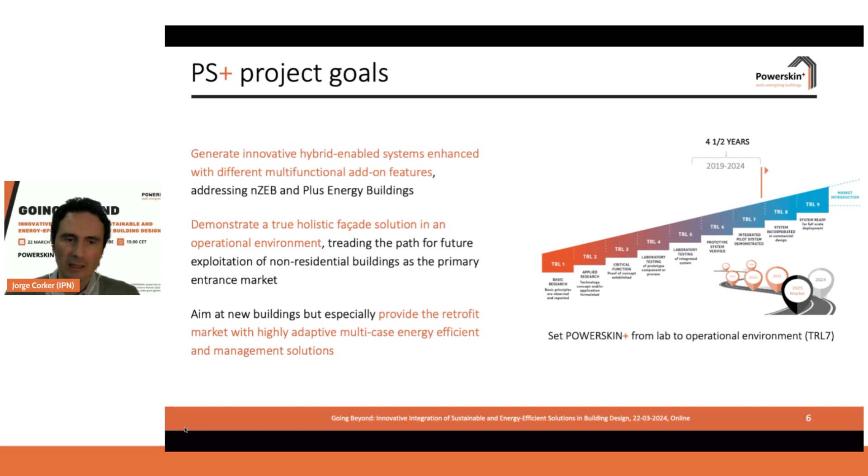The project goals were very straightforward. The aim was to generate innovative hybrid-enabled systems enhanced with different multifunctional add-on features, and to demonstrate all these systems in a true holistic facade solution in an operational environment. We were aiming at new buildings, but especially we wanted to provide the retrofit market with highly adaptive, multi-case energy efficiency and management solutions.

So we tried to gather a number of key enabling technologies for smart curtain wall facade solutions, dealing with super insulative and energy efficient elements, multifunctional nano coatings, solar energy harvesting components based on flexible solar cells, active and passive thermal storage materials and elements, and electric energy storage features.

We tried to focus on providing the future market with both standard, less costly solutions, and a bunch of different combinations possible, which will obviously be more premium in terms of cost. We aimed for different solutions for different geographical conditions, building types, national regulations, and budgets, trying to find a true energy management turnkey package following superior energy efficiency and sustainable eco-design standards.

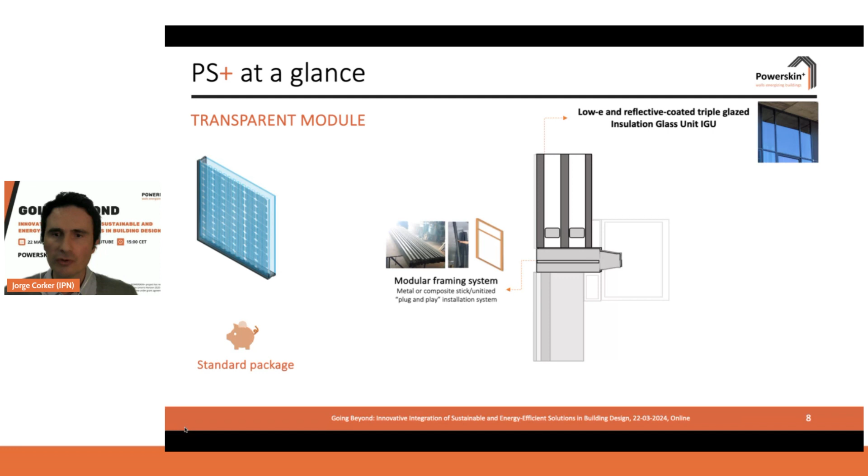Just to give you a glance of what we've tried to do: we divided the project into transparent and opaque modules, and always tried to find a standard package. In the case of the transparent module, that could start with a modular framing system, either metal or composite, a stick or unitized system installation, combined with low-E and reflective coated triple glazed insulation glass units, standard IGUs, and then filled with different layers of add-ons.

For the transparent module, we had microfluidic devices for active thermal storage, using capillary glass sheets with heat storage materials. We enhanced these transparent modules in the premium designs with facade building integrated photovoltaics based on semi-transparent perovskite PVs.

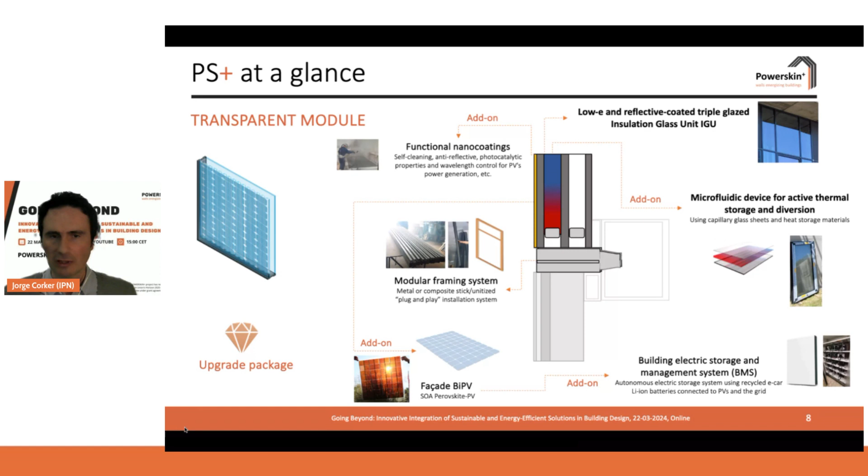We combined these PVs and this harvesting energy solution with a building electric storage and management system, using an autonomous electric storage system with recycled e-car lithium-ion batteries connected to the PVs - and that can be any PV, not just the perovskite one - and also connected with the grid.

These transparent module add-ons can be combined with functional nano coatings for self-cleaning, anti-reflective, photocatalytic properties, and wavelength control for the PVs. The opaque module standard package, again a little less costly, starts with the same modular framing system, combined with skin frames made of glass, composite, or metal solutions, having inside a super insulation module made of vacuum insulation panels, VIPs, and recycled EPS frames.

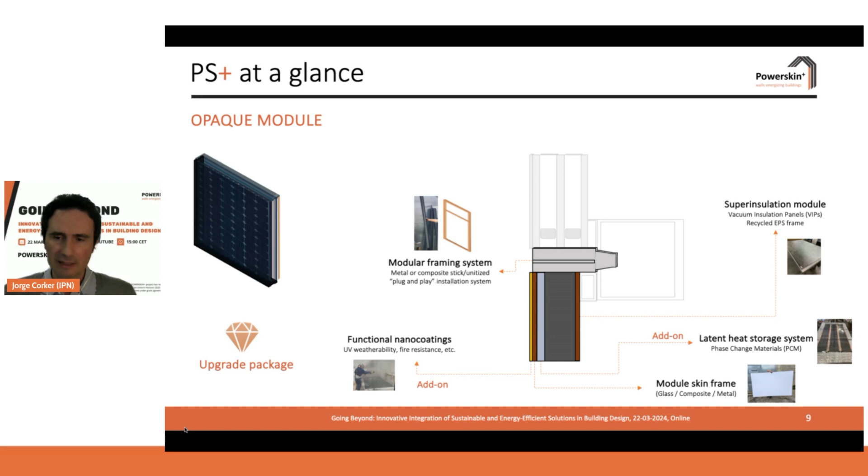The upgrade package combining this initial solution can be enhanced with functional nano coatings for UV weatherability and fire resistance capabilities. We also provide an add-on with latent heat storage systems based on phase change materials. Again, like in the transparent model, we combine this with facade building integrated photovoltaics - opaque perovskite ones - and the same electric storage management system described previously.

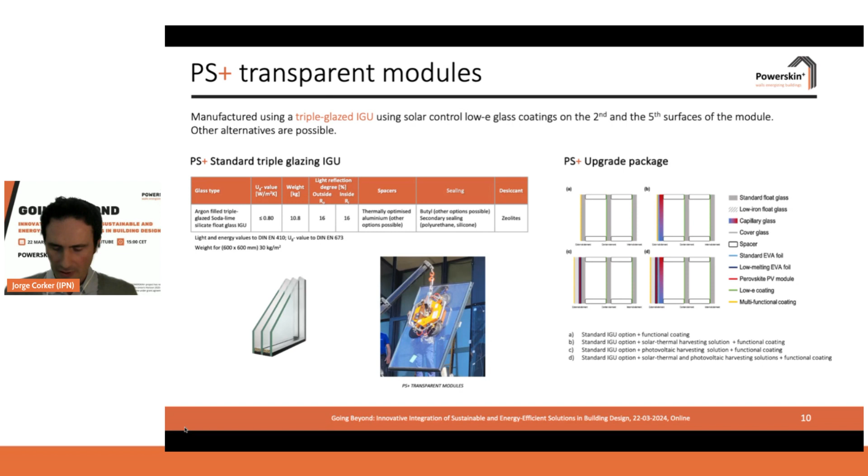So the transparent models use triple glazing IGUs with solar control low-E glass coatings as a standard. In the upgrade package, it can be combined with different functional coatings, different solar thermal harvesting solutions, the glass capillary system we developed, or the semi-transparent perovskite solar PVs. This is how we envisage these transparent models could work in different solutions.

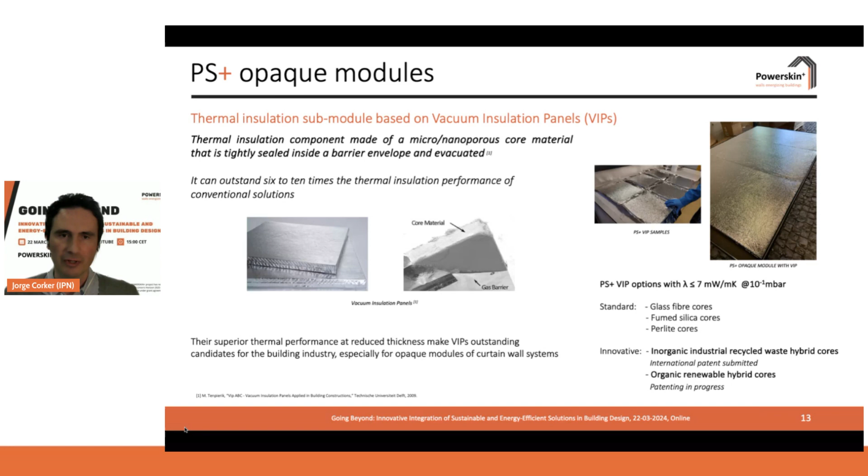Regarding the add-ons for the transparent model, we have a patented glass-to-glass capillary fluidic device for large area integrations with adaptive facades and smart windows. These are flat laminated glasses made through a microstructured glass sheet and a thin cover glass using a polymeric interlayer. The capillary channels are filled with liquid, providing optical transparency. You can see some installed examples at your right—it's transparent, you can see through it—enabling efficient solar thermal heat harvesting as well as heat exchange at outdoor temperatures upwards of 8 degrees.

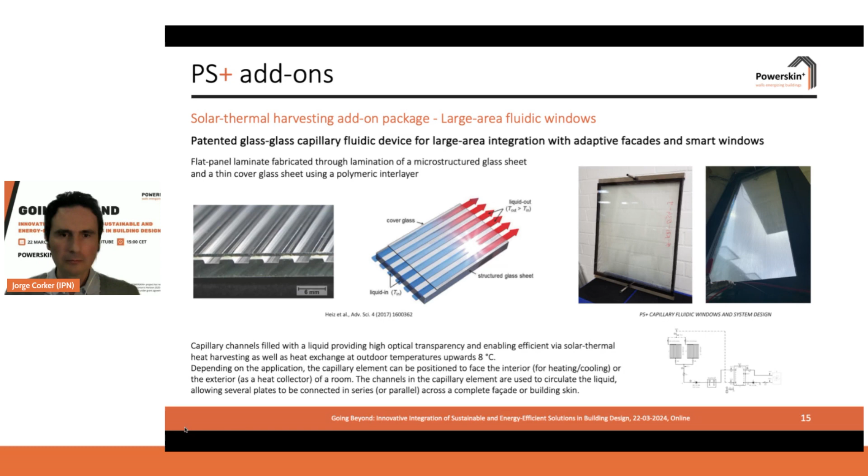Obviously, perovskite technology combines a lot of advantages when compared with conventional PV technologies. It's still a little bit below in TRL development, but it's increasing, and we believe we've made some advances in our project towards bringing this new type of technology more into practice, and in the future it will become a reality.

Regarding multifunctional coatings, we've designed, developed, and tested different types of coatings for the semi-transparent and opaque models, regarding self-cleaning, self-healing, infrared reflectance, transmission enhancing, and flame retardancy, using titanium oxide nanopowders, silicon oxide nanopowders, and indium tin oxide ones.

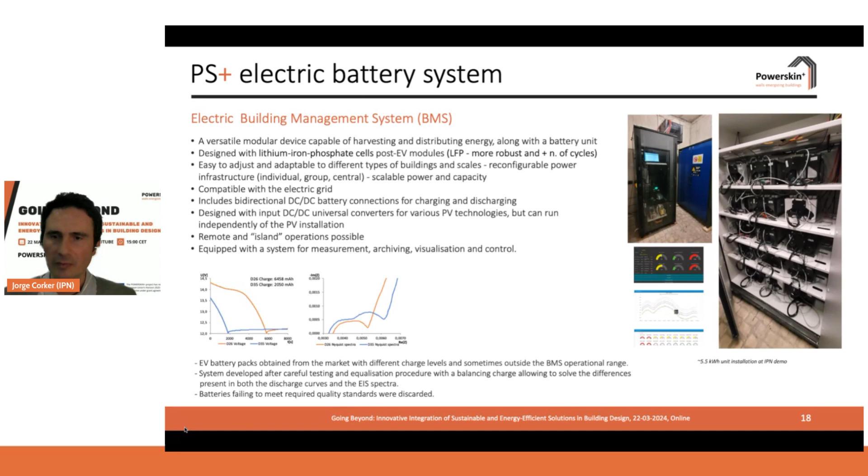We also had a lot of mock-ups and testing installations. I just put three of them. In Polytechnic of Torino, we had a 4 square meter mock-up with a lot of different technologies developed: standard, opaque, and transparent modules, premium ones with microfluidic glass storage systems, and premium opaque models with building integrated photovoltaics.

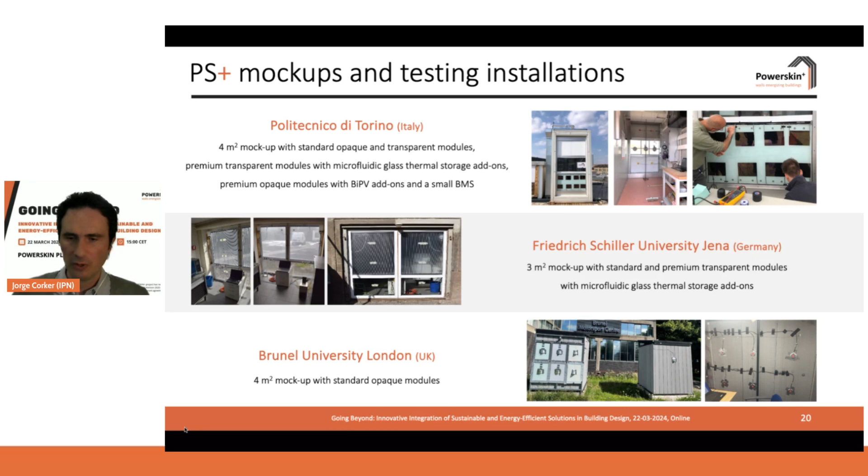We had Friedrich Schiller University Jena in Germany with different mock-ups, also a little bit more related with the transparent models and the microfluidic glass system. And in Brunel University, London, in the UK, we had mock-up test cells with standard opaque modules being assessed during a one-year period.

Regarding the demo sites, we've tried to have these systems demonstrated in an operational environment in three different non-residential buildings in three different European countries: Portugal, Germany, and the Czech Republic. We assessed a lot of different issues regarding these installations, regarding inner thermal and visual comfort, clean electricity production, and energy savings. We had demonstration activities with installation and operation guidelines.

We have been developing some BIM library, and also all this assessment was backed up with LCA, LCCA, and social assessments towards economic and environmental sustainability principles.

I'm just going to show you some examples of two of our demo sites. One in the Czech Republic is still being dismantled - it's part of our activity, so I won't get too much into detail - but in Portugal we had a 61 square meter facade.

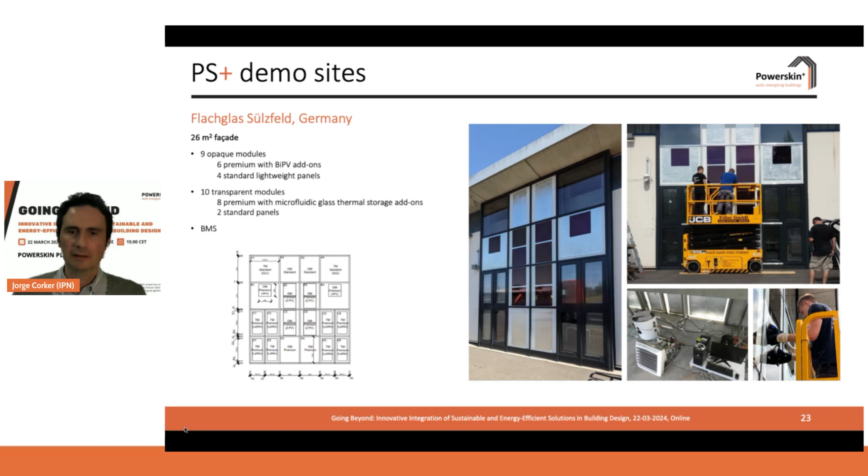In Flachglas Sülzfeld, Flachglas premises in Germany, we had a smaller facade, almost 30 square meters, with 9 opaque modules and 10 transparent ones, and also a BMS system. We used these facades to monitor the capabilities of the different solutions that we've developed.

The latest Renovate Europe report states that 18 jobs might be created for every 1 million euros invested in the energy renovation market. So this is something we should look at very closely and harbor these new innovations in order to speed up the transition, but also to renovate the economy in our continent.

And considering that we might have a very small share of the market, the Powerskin technologies can still be involved in a very big market rationale, in the first years of novelties that can be commercially deployed. So it's very important that we can bring this right after the project onto the road to market.

We are working on it. We already know more or less how we can exploit and who's going to be exploiting what within our project. We have key partners lined up for making this deployment for the market. So we are very hopeful that we might generate some impact with the innovations and with the support that the European Commission gave us.

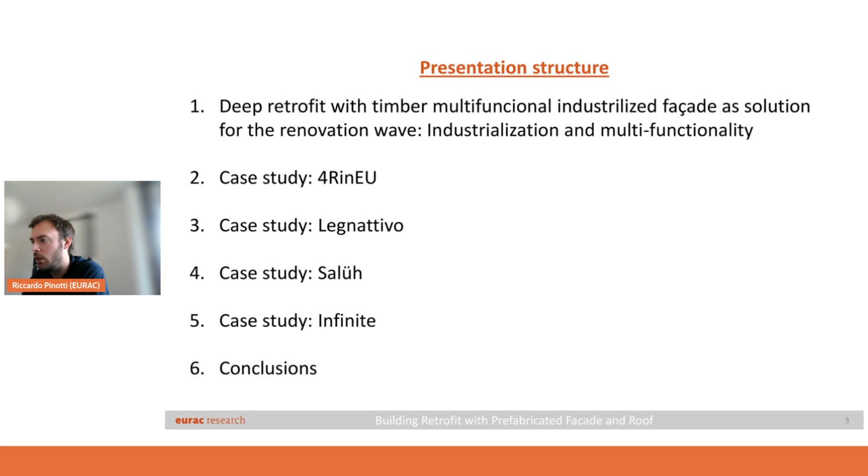At EURAC, we studied and are studying, developing a lot of projects on this topic. So I will provide an introduction to this kind of intervention on existing buildings, and then some study cases we developed in different European and national projects.

These are numbers we are all aware of: about 40% of consumption is due to the building sector, with a huge amount of emissions, and a strong need for solutions which can foster deep retrofitting together with fast retrofitting of the building stock. This retrofitting wave is not progressing as we would have expected, so we need technological solutions to speed it up.

What we propose and are studying is intervention on existing buildings based on using prefabrication coupled with timber manufacturing to build modules which are attached to the existing building, basically creating a new skin for the building - a new envelope and a new structure.

The idea is not just to provide new insulation in terms of thermal performance, but also to provide the so-called deep retrofit - not just thermal, but also from the comfort point of view, and maybe from the aesthetic point of view.

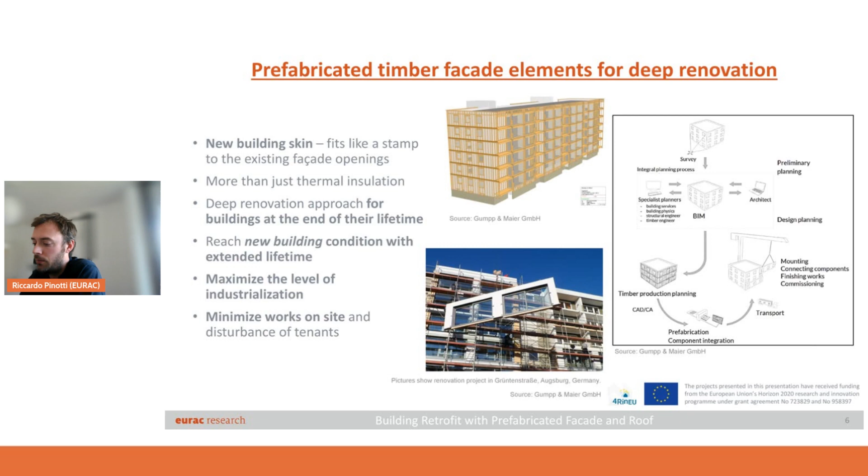The aim here is to maximize the works performed off-site, in factories, and minimize the work done on-site, on the building site, also to reduce occupants' disturbance.

These modules, you can see an example here on the right in the picture, may be bigger or smaller. In this case you see a big one, but we will also talk about smaller kinds of modules.

They should be easy to apply and install, and of course an added value of the prefabrication is that we can reach a higher quality of the technology itself.

As I said, it's not just about the insulation that is added, but with this kind of intervention we are also able to integrate multifunctionality within the new envelope. We'll see examples later, but I'm talking about windows, new shading systems, new ventilation machines to improve indoor comfort, and whichever kind of cladding, maybe green facade or also technology capable of producing renewables.

As I said, the aim here is to maximize the work done off-site. The more we can achieve in the factory, the better it is - the less we do on the building site.

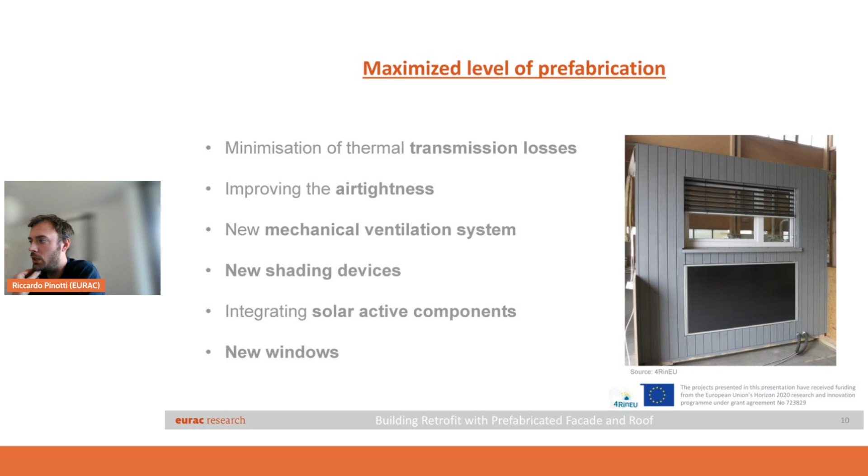Here you see an example of a prototype we did for one of the projects, called 4RinEU - already concluded, a European project, EURAC coordinated. This was a prototype of a timber frame module integrating new windows, new shadings, and a solar thermal panel, together with a ventilation machine beside the window on the right side. These were the features we tested during the prototyping activities.

A very important point, I would say very critical for this kind of intervention, is the anchoring to the existing facade. This depends on which facade or building we have - it may be a concrete building, or a timber frame building again. Depending on this, the anchoring system has to be defined.

On the concrete ceiling, for instance, we were able to attach timber beams to which we then attach the new modules.

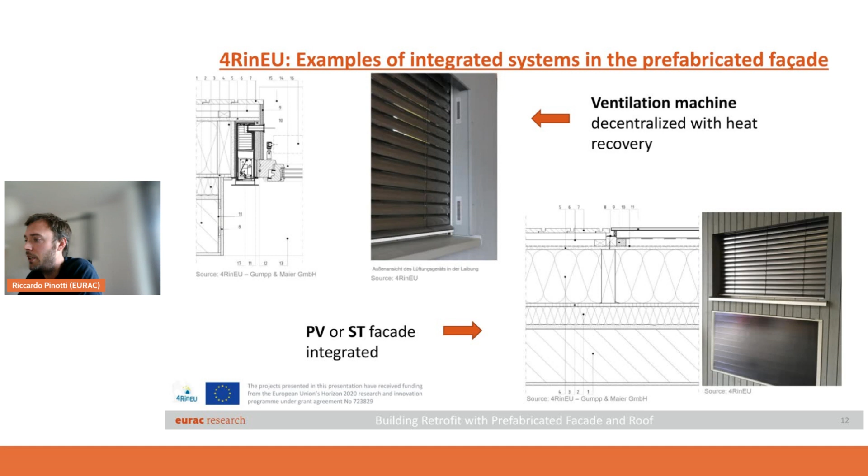Here you see some kind of installation that provides the multifunctionality. This is a horizontal section where we can see, top left, the installation of the ventilation machine, and the solar thermal panel on the right. Here again, other kinds of integrations dealing with the ventilation machine and its ducts, all going through the prefabricated facade.

We start now with the first case study, coming from the 4RinEU project. Here we had 4 buildings to be renovated, and in each one we tried some of the features of this kind of intervention. On the left you see the pre-retrofit condition. They were all quite poor buildings in terms of thermal performance and indoor environmental quality, and all the interventions addressed this. On the right you see the final outcome of the renovation.

In this case, in Norway, we added the new facade as well as the new roof, both prefabricated, with some PV panels integrated and new windows in the modules, together with a ventilation machine installed behind the building, exploiting a cavity already present there.

This is the Spanish demo, a concrete building with a lot of problems related to mold growth. On the right you see the final results.

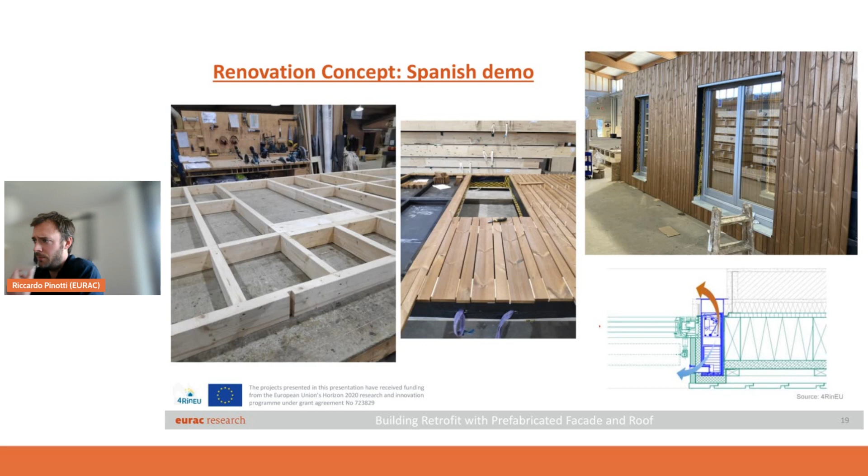This is the installation phase, and you can notice that scaffolding was not even necessary in this case. The L-shaped steel anchoring was already in place, and the 6 modules were hung, with 2 workers and 1 operating the crane.

Then some works were needed from the inside to fix the part around the windows. On the website you can see a lot of videos and time lapses of all the interventions.

Another project we developed is Legnattivo, a regional project with European funds. In this case, instead of studying big modules like those seen before, we opted for smaller modules, trying to create a sort of configuration possible between different technologies to be installed.

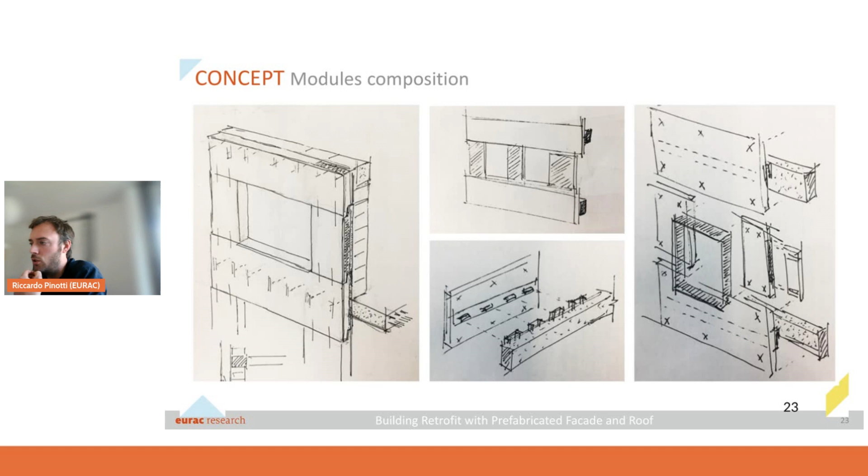In this project we didn't perform any activity on real buildings; it was just a theoretical exercise, together with a prototyping activity we developed at EURAC. We created a real scale prototype including 3 sub-modules: a passive one, one integrating a duct needed for the ventilation machine located in the other modules, together with a window, and then a PV module.

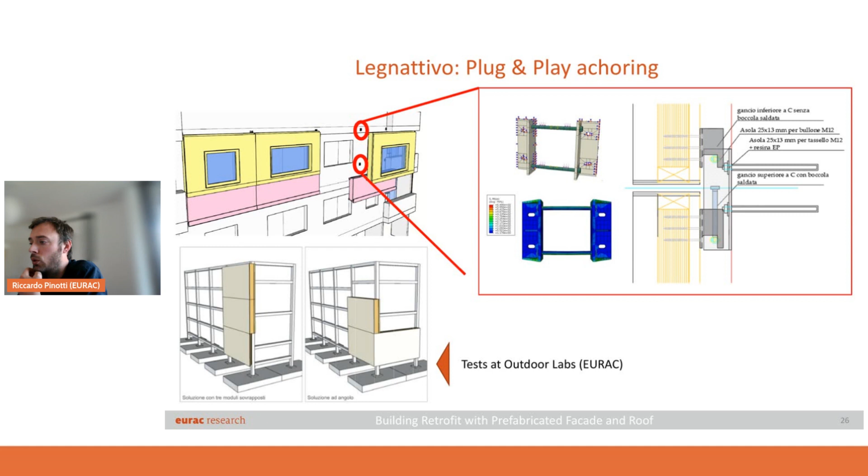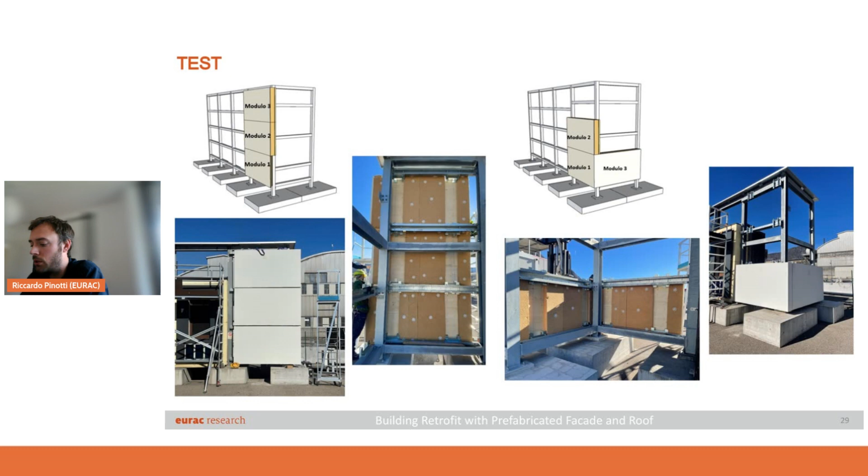We also studied a lot about the anchoring system, which had to be as plug and play as possible, allowing anchoring and disanchoring of single modules independently from the others around. We developed some prototypes and tested them at our facilities, including a small passive module where we studied the functionality of the anchoring system, trying different configurations of installation and uninstallation.

Another really important topic included in this project was the integrated seismic and energy retrofit, related to earthquake solutions to prevent seismic events. Together with a colleague from the University of Rome, we studied this kind of exoskeleton, embedded in the whole building, inside which it was foreseen to have modules for the energy retrofit.

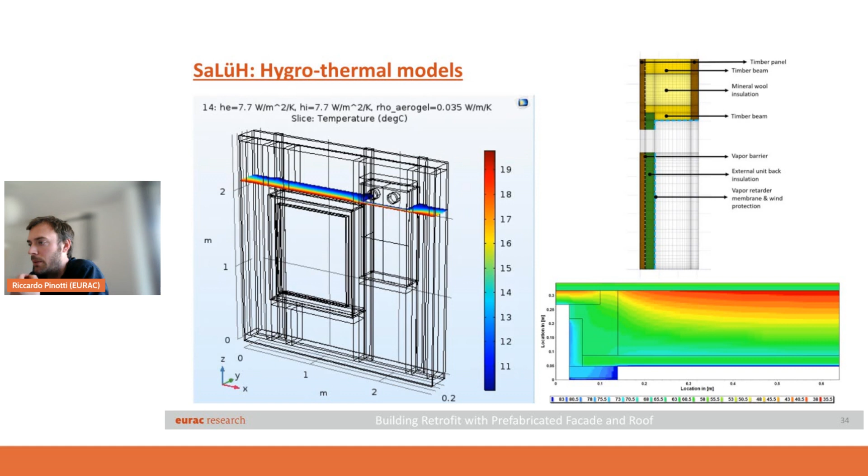Another project I personally worked on during my PhD at the University of Innsbruck was another timber-based envelope for retrofit. In this case, it hosted a micro heat pump and some ducts. Here you see the stratigraphy and new windows. It was tested in a passive cell from the hygrothermal point of view. We did analysis in terms of thermal bridges, trying to understand whether critical components such as the compressor and evaporator of the heat pump could create issues within the facade.

The last case study is another European H2020 project we are coordinating at EURAC, called Infinite, still ongoing. It's again related to prefabricated wooden-based facade as well as roof, with different technologies involved in the studies. Starting from the cladding, we are studying green cladding, so green facade, and the irrigation system integrated in these new modules, then BIPV modules.

These are all photovoltaic panels, different colors and different efficiencies, but from the aesthetical point of view could be an added value and foster the use of renewables in the facade. Together with this, solar thermal is integrated into the facade - we'll see a picture later with this collector for solar thermal.

From the integration point of view, Infinite is studying the integration of a ventilation machine, but in this case, instead of the one we saw before, this machine is meant to serve the whole floor. So it's a quite big ventilation machine with a lot of ducts to be integrated, which was quite challenging. And finally, some smart glazing within the windows.

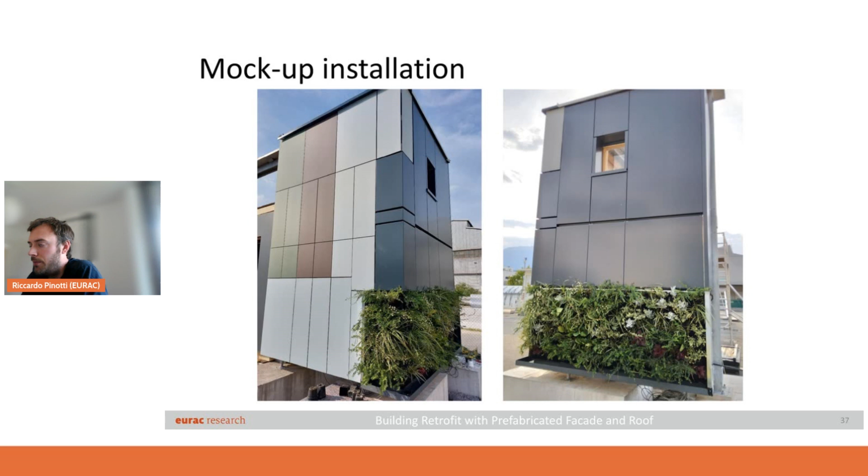Here you see the technologies related to the cladding I mentioned before, photovoltaic panels and the solar thermal collector on the facade together with the green facade. This is just a sketch of the integration of the ventilation machine within these prefabricated modules and its ducts. We studied ventilation integrated below the window, and also in another configuration on the balcony side. These are the prototypes we developed.

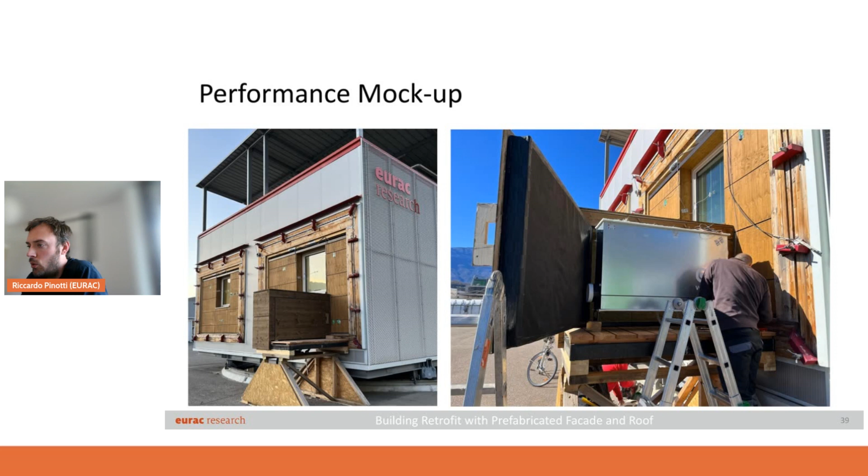The two facades are similar. On the left, there was no integrated solution, just a passive facade as reference. On the right, we studied integration of the ventilation machine below the window and beside the balcony. Behind these two facades there are two divided rooms in which we can study and create the conditions of temperature and relative humidity that we want.

To quickly get to the conclusions, due to the inefficiency of the building stock, as I said before, a real renovation wave is needed. Spot interventions are not enough - we need a massive alternative to renovating the whole building stock. In our opinion, industrialization of the process and the use of prefabricated panels can be the solution. We still need to discuss the level of multifunctionality we want in these modules, but prefabricating them could really speed up the process. This speeding up could be helped by digitalization, supporting not only the construction process but also design, installation and delivery to the site.

Yeah, of course, from the performance point of view, I would say it's clear that this kind of intervention has a huge potential in terms of thermal energy and thermal performances, as well as allowing an increase and a better indoor air quality together with indoor environmental quality for the users.

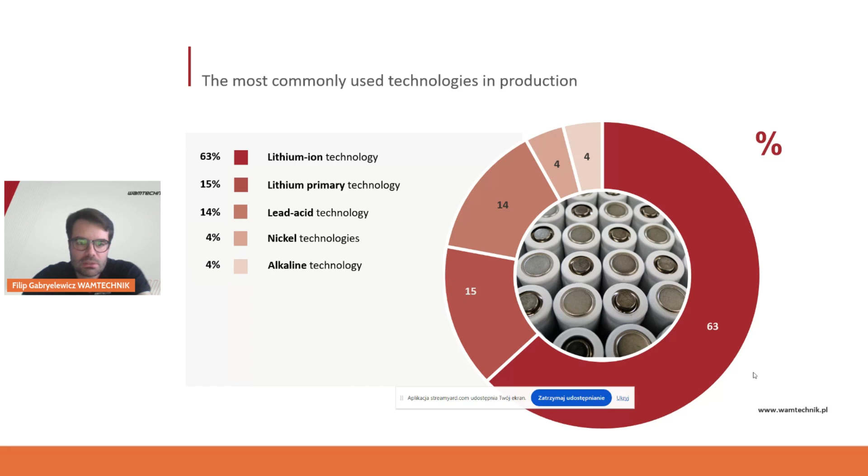Obviously, for the project and for the home appliance, I would say that the current idea is to make it in lithium-ion technology. But I believe that we also have to understand some challenges when we are talking about this technology. Let's maybe pass that one.

When it comes to lithium-ion technologies, right now on the market, we have three main ones. The standard one, the most popular, is technology at 3.6, 3.7 volts. Depending on the chemistry, usually it's NMC, NCA, LCO - it's just the difference of the cathode material. Here in this technology, we will have the biggest energy density, and we can basically say that this technology is the most active one right now in EVs.

Nevertheless, you can also find LFP and LTO cells, battery packs, which are also running in EVs. And I would say for the home storage, we would focus on the LFP technology, which has slightly lower voltage and a bit lower energy density. LTO, maybe not all of you know, it's technology used, for example, in buses, because you can basically charge it in a very short time - like 8 minutes, for example, you can recharge the bus.

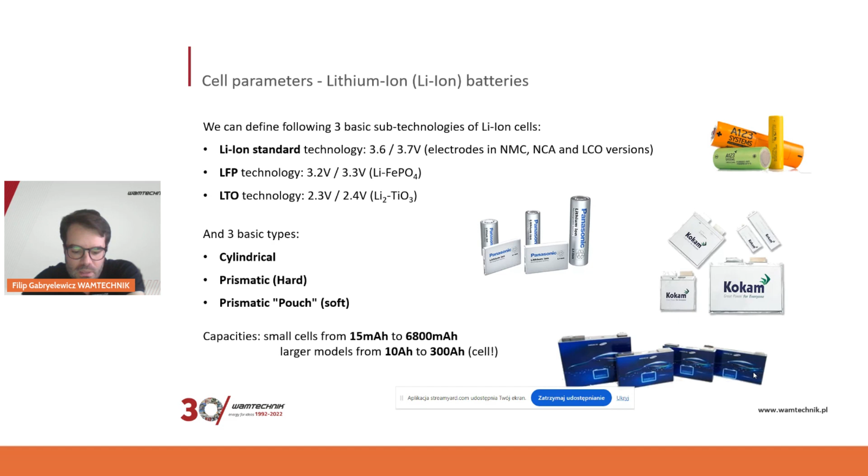When we talk about the features, I would say that all lithium-ion technologies are limited because of the necessity of R&D and because we need to build and implement some kind of management system that will ensure the safety of the application. It's quite important - I will show it to you in a minute what is the actual behavior of those cells, to understand that this energy, which is inside of the cells, inside of the batteries, is pretty huge, to be honest. And we need to ensure that we'll have stable and safe operation at all times.

Maybe let's just pass that one. All the examples I will show you are prepared because we have our own lab and own production and own design. WAMTECHNIK is doing different projects - we have small battery packs, which are just one-cell battery packs. The biggest we produced were actually for buses, where each battery was around 160 kilowatt hours, and that would be the application which we are talking about here.

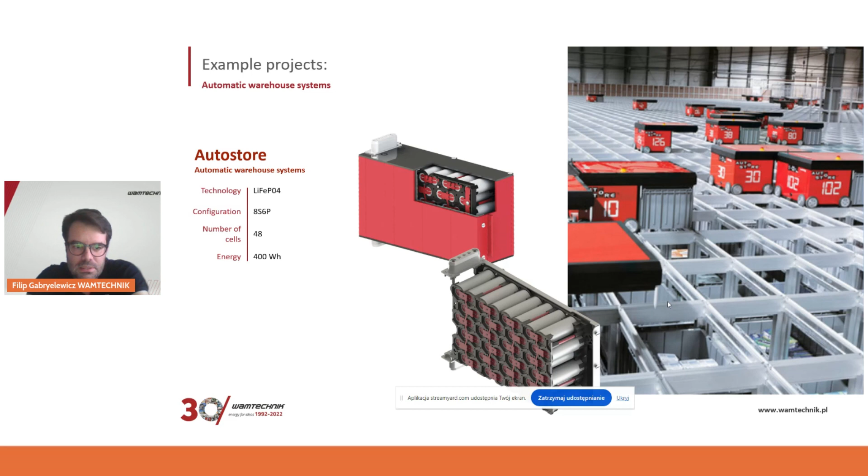Just two examples - one of the most common is an automatic warehouse system in LFP technology, and LFP was chosen because we need to ensure higher safety in warehouses, and I believe that this technology right now is the best when it comes to home appliances. Also, we are doing some challenging battery packs, but usually when you need higher currents - so higher charging, for example - then we would have to switch to NMC technology, which has no such limits like LFP technology, and the limit is actually the charging current, I would say.

Currently, all the clients and expectations from the market are that we need to improve the energy density, and we need to have the longest running time of the battery in any application. So I would say that's the challenge, because energy density and the behavior of lithium-ion cells is stable when everything is okay.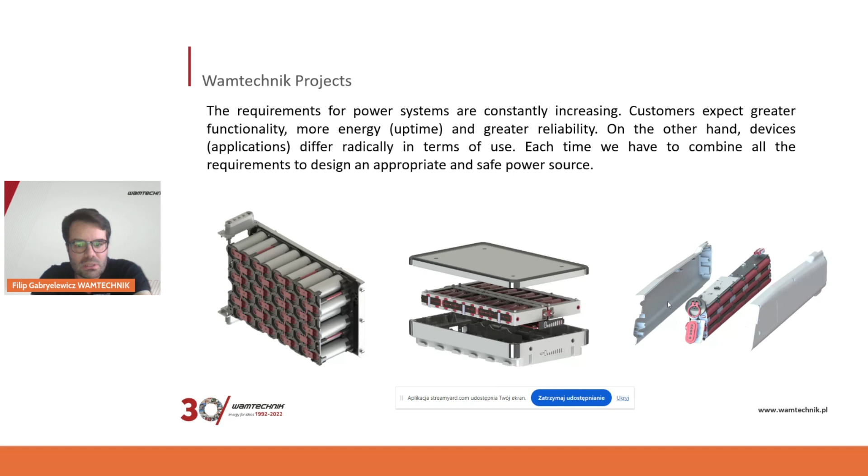But if we just go into some examples I will present to you, then maybe we will understand better that it is very important to control the operation and have a complex management system, a battery management system, that will ensure the safety of the operation.

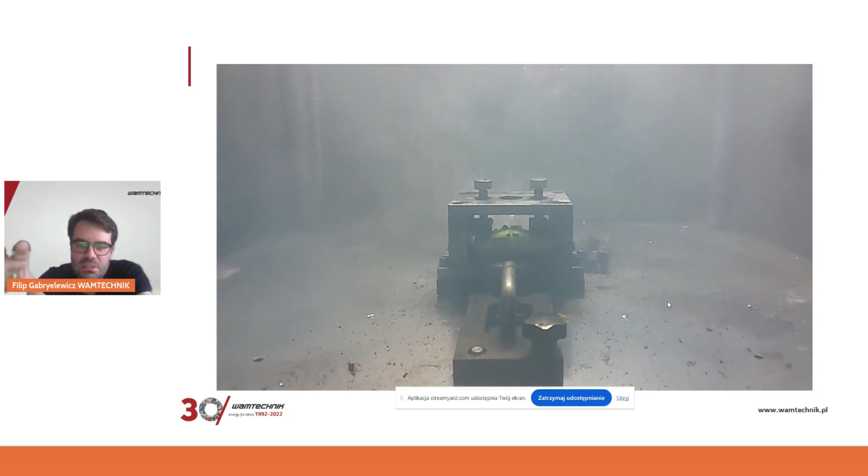So in the first example, I hope you can see the movie which is running. We have here the LFP cell, A123, a very good and reliable one. I am showing you the nail penetration test. Those are the tests we do in our lab to understand the behavior of the cell and the technology. In this example, it was a fully charged cell that rested for at least 2 hours before I did the test.

And we cannot see any fire. That's quite important for this presentation. No flame actually, just some fumes, some pressure, but it was quite stable behavior.

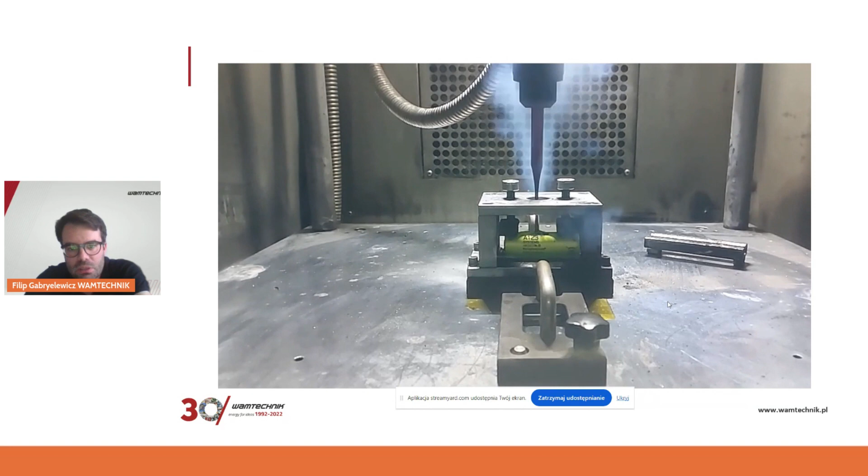But also with the LFP cell, if we talk about a cell which was charged a bit more than allowed, it's getting not so nice. We have a flame already, very big pressure, and the cell was completely destroyed. I'm showing those examples because here we charged it above the maximum voltage level possible for the LFP technology.

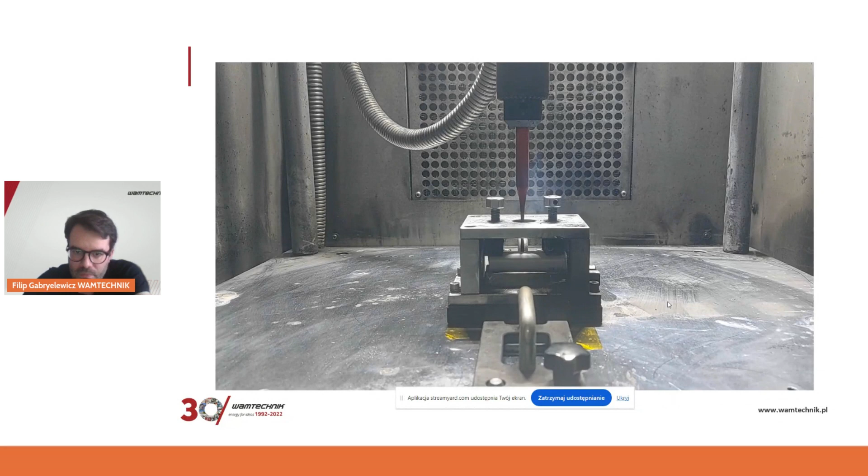Just for the presentation, here is an example of the NMC cell and its behavior. I like to show this one because, as you can see, this is an NMC cell and we have an example where we do not have flame, we do not have any fire. That's because this cell was charged to 4 volts, really limited from the possible 4.2 to 4.25 maximum voltage level for the NMC cell. So you can make a stable and safe battery pack with NMC technology.

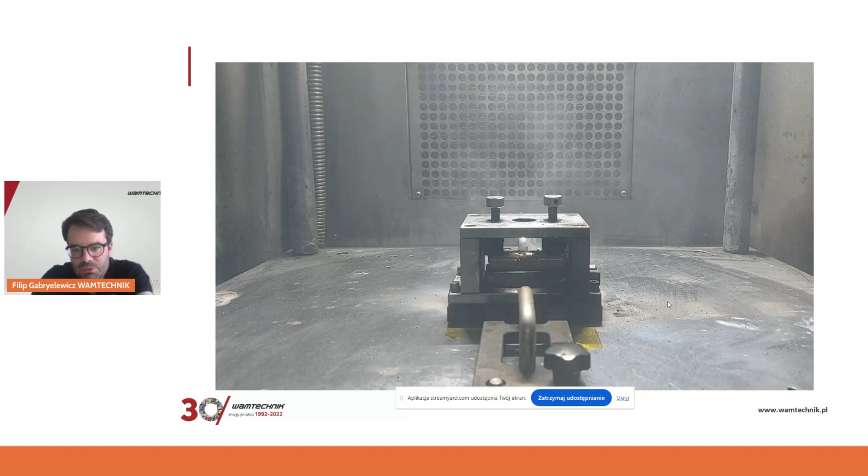But most cells these days in all applications we have at homes are usually charged to the maximum level. Here you will see the standard behavior of the NMC cell when it's broken, charged to 4.2 volts, so most of the applications. A lot of flame, a lot of fume, big pressure coming, and basically you can see that it's not a safe behavior, to be honest.

So to sum up what I wanted to show you, it is very important when we design the battery pack and the power source to have this understanding about the charging voltage and also about the SOH, the state of health.

You have here on diagram number 3 information that comes from one of the main cell producers, showing that reaching a certain SOH, state of health, also gives us an additional requirement that we need to limit more the charging voltage, so we ensure stable performance of the cell, of the battery. This is quite important, I think, for the application we are discussing, because the cells that will come from the EVs and from that sector will be used ones. So we have to consider in the design that possibly we will have to limit the charging voltage, and we would have to get a good understanding of the SOH, the state of health.

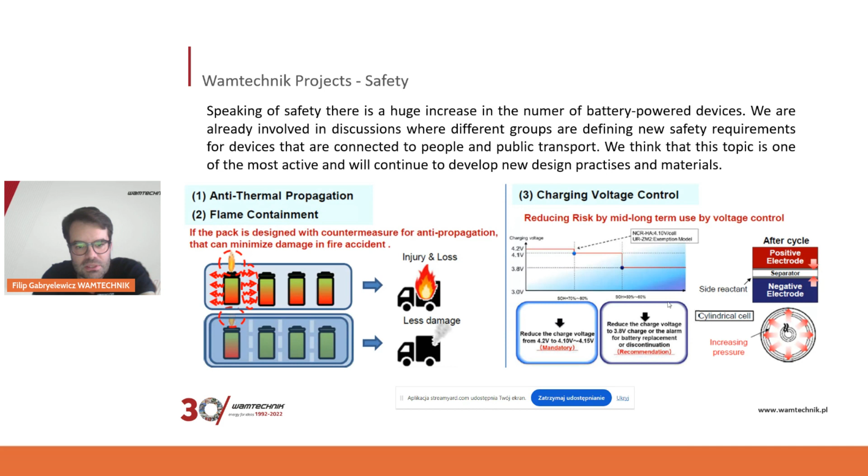It's good, actually, because right now the European Union implemented a regulation called the battery regulation, and in this battery regulation you have some rules coming to the market starting from August this year. One of the key aspects is that all producers of battery packs for certain categories, industry category with more than 2 kilowatt hours, and that's the home storage system, will have to give you information about the state of health. So in my opinion, it will be quite easy to control and understand what's the current status of health of the battery pack.

And yeah, that's actually from my side. Maybe it was just a short presentation and just some insights from the market, but I believe that understanding batteries, understanding chemistries, and getting those requirements into developing the battery systems are the most important ones. So we will have stable and safe operation.

Thank you. Yes, Filip, many thanks for your presentation. Great one, at least for me, because I have a battery pack here in my installation. Just, if you still have 1 minute, we have a question coming from the audience related to these safety issues that you talked so much about. It's from Sergio Lorenzo, asking how do safety issues influence the deployment of post-EV cells in building applications?

And what considerations should be addressed to ensure compliance with electric codes and fire regulations? I know you mentioned this new EU regulation about this. Does this regulation also apply to recycled batteries, or any type of battery system? And also, I would like to know your opinion about the transportation of these battery pack systems, because it's not just installing and operating, it's also transporting these packs for recycling. It's a big issue, and we had this issue in our project.

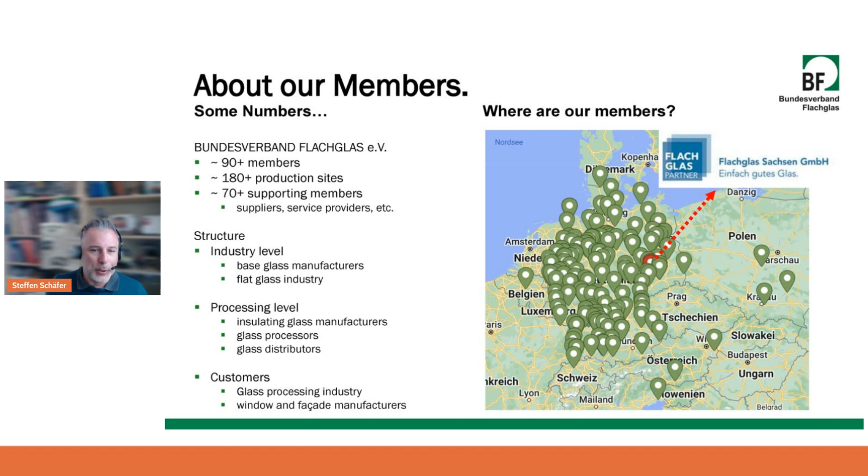Short about our members, here an overview about our members in and out of Germany. And here you can see also the location of our member and your project partner, Flachglas Sachsen. Mr. Witte asked me to do this presentation. I think I don't have the time to speak so much about the whole details here, but it's important for me to say that we are open for supporting members, suppliers and/or service providers, which can also become a member of our Bundesverband, and we can share experience, and you have maybe also a little bit of advantages if you are a member. So if someone is interested, let me know. That's about the Bundesverband.

About new interesting glass products: I've seen you have also used a lot of glass in this project, so there are new requirements. I couldn't decide which product or which application I wanted to present to you, so I've decided to give you a brief overview of what is currently interesting, what's moving the glass industry, or which products or applications are currently a big topic or becoming one. Glass is an invisible but very multifunctional product, as you have seen in your project also, and it always has to be able to do more and more. As you tried also in your project, a new function. But what does it mean?

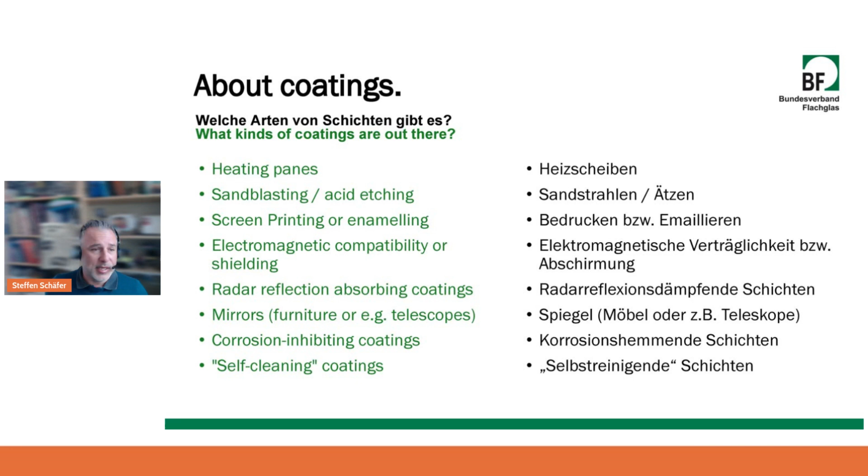But we have not only coatings, but also other requirements that glass can or must fulfill in addition to the coatings and all other technical requirements. We have safety glazing, break resistant, bulletproof, sound insulation glazing, fire resistance, structural requirements, switchable glazings, media facades, curved glazing, and combinations of the previously mentioned coatings, or maybe combined with new requirements in your project. So that must be all in one product.

In Germany, we call this the eierlegende Wollmilchsau. That's a really tough product when you combine so many different things in it. Maybe also new requirements are coming with a new European building regulation in the next one or two years.

That's the reason I want to start not really with a product. I want to share with you this topic instead. As you can see, not a product - it's currently the topic occupying us, and it will continue to occupy us for a long time in the future. That's sustainability. I heard it mentioned in some words, some slides before.

New products, yes, we need new products, we need new ideas, but the glass industry, in this case our industry, has to do some homework. We have to think more long term. We have to think about recycling or reuse. For example, maybe you have also considered it in your project - what is the glass doing afterwards? Can you reuse it? Can you recycle it? Can you remove every part of the glazing and the other parts of the product?

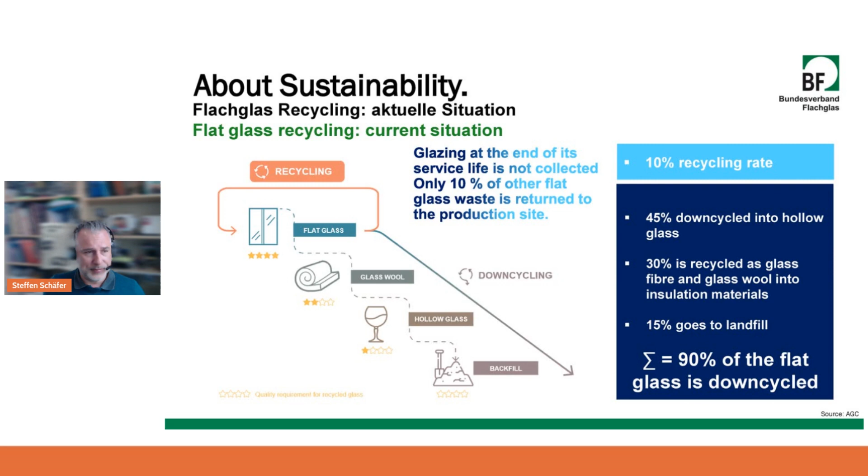Additionally, glass is an energy intensive industry, and we need gas. Gas is the energy source for the production of flat glass, and it needs around 1600 degrees Celsius to produce glass. This results in high CO2 emissions due to the burning of fossil energies, and the lack of glass recycling and reuse results in additional emissions.

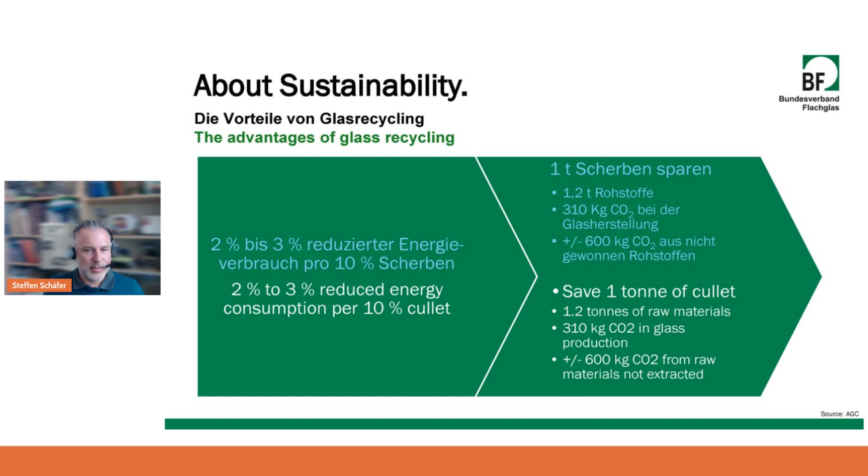How can we help? 2 or 3% reduced energy consumption per 10% cullet. So we need this cullet. That means 1 ton of cullet saves 1.2 tons of raw material, 310 kilograms in glass production, and around 600 kilograms of CO2 from raw materials which are not extracted. So it would be nice to have low carbon glass.

The conclusion - glass manufacturers understood some years ago, due to the climate crisis and also the Ukraine gas crisis, that reducing CO2 helps the climate and also helps reduce energy costs. That's a fact. So recycling of flat glass is an important factor in our production, and I think we need low carbon glass.

We try to help the industry by specifying a specific solution for our industry, for the market, called the EPD - Environmental Product Declaration. We have done it for float glass, toughened glass, laminate glass, and IGUs. In this case, we have average values provided by our members used to obtain an industry average for glass production, and this leads to the EPD for glass products.

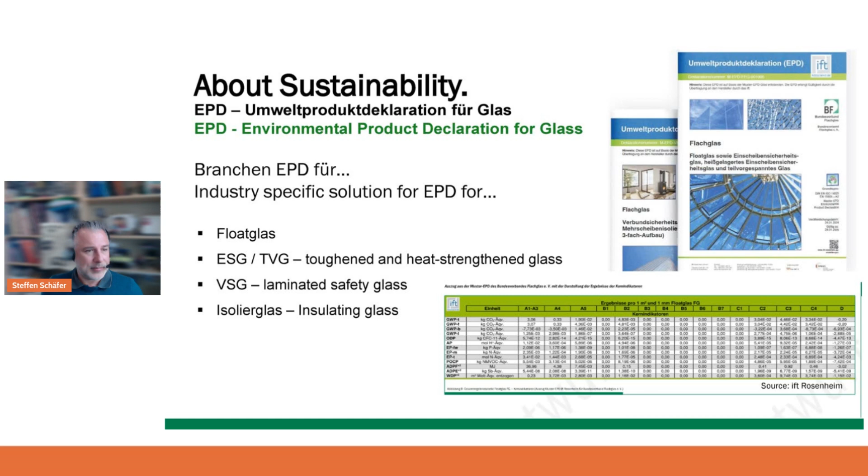We also have a working group for climate and sustainability with all glass producers, glass processors, and so on. We've produced an information sheet for our members, which is really important to explain things in simple words. In this case, we explained the EPD in simple terms, how to read it, how to apply it if necessary, what values you get, and how you can compare environmental product declarations.

It's really important, because if you don't know how to compare it, you cannot compare it at all. Some glass manufacturers already have their own EPD tools. You can check yourglass.com from AGC, where you can build some glass, click a button, and get an EPD for it. This information sheet will also be published in English when we are ready.

That's only about low carbon glass, which has also been available, I think, for about a year now, and you get it normally from all the big suppliers. They find new technologies to reduce the carbon footprint, which is really important for the future.

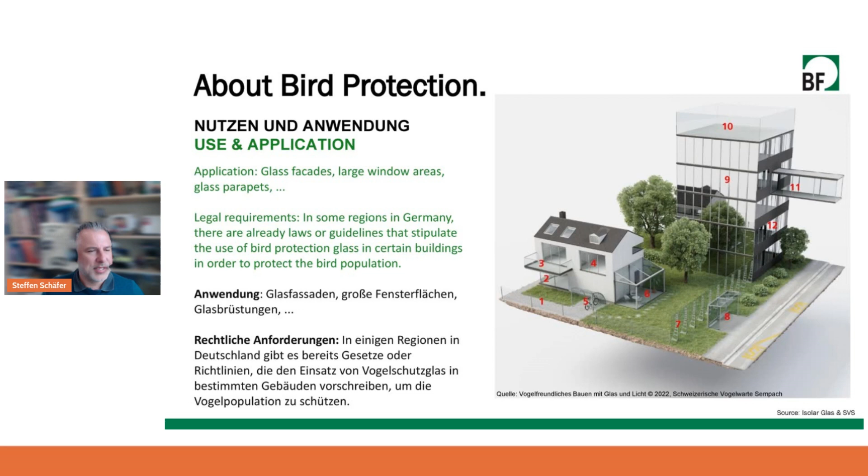I heard yesterday from someone that yes, they have to do something for bird protection, but what can they do? Birds have two big problems. The first is reflection - a mirror effect, when the bird recognizes a mirrored tree or forest in the facade and flies up to it. I think you know it - everyone has maybe seen a bird flying against glass in a house or wherever, and it happens because of these two problems.

The second problem is transparency. If the panes are highly transparent, the birds may not be able to recognize that glazing has been installed between the target and the bird itself. So maybe you can recognize the problem here, and you have to check it.

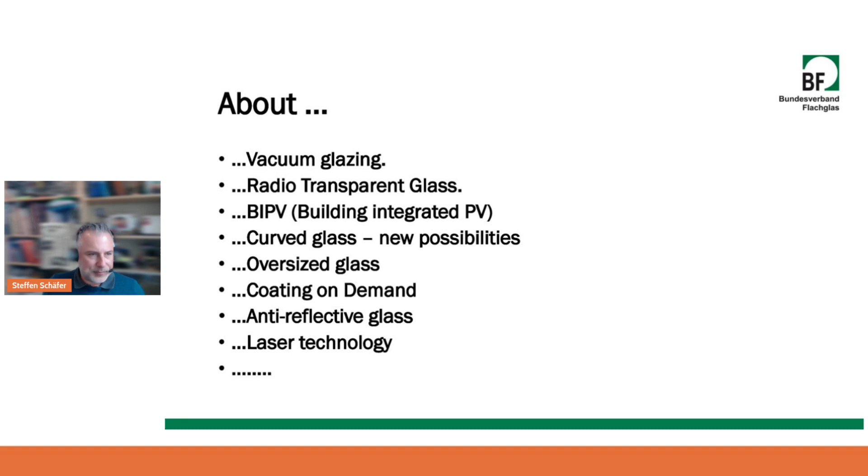So that's the foils - I'll go through them a little bit. What I can show you here for vacuum glazing is Fineo Vacuum Hybrid. That means you have one vacuum glazing, and on the other side a coated standard float glass, and with a double IGU you can get a UG value of 0.4. That's really interesting, a new product, and it's also available in the DACH market, Belgium, Netherlands, and UK at the moment.

Radio transparent glass - okay, I've told you about that, and BIPV. New possibilities for curved glazings - you see these are also based on laser technology, also really good, really nice. I've seen the prototypes, and it's also possible to do it for the whole glass edges in windows and so on.

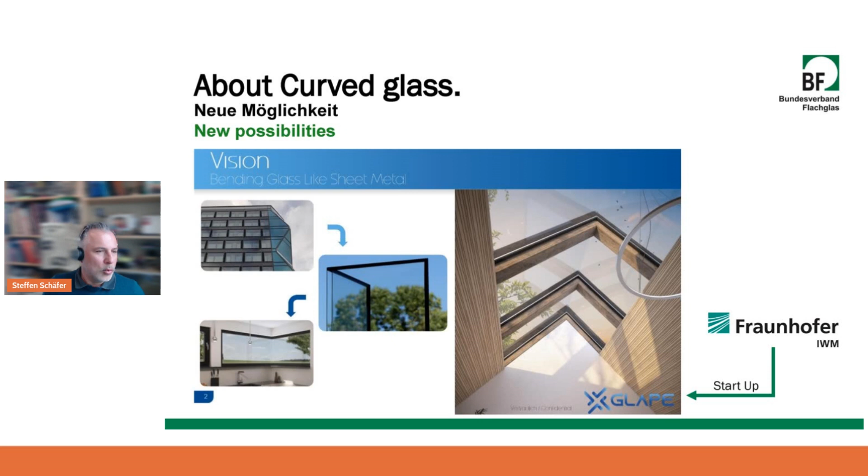So in the end, finally, here's our homepage. If you need information about the glass or our BF bulletins, you can go on the downloads and you have everything here for free. Follow the QR code. Please always be open for new ideas, stay curious, and think out of the box. Thank you, and I wish you a great presentation and a nice weekend.

Hi, Steffen. Many thanks for your presentation, great insight. Probably we should have much more time to hear from you. Great that you introduced the sustainability approach to glass development, and great to know there are new technologies for bird protection—we could use that a lot here in our facilities. We have a question for you, and probably you can give some insights.

It's from Anna, and she's asking: Looking ahead, how do you foresee the evolution of multifunctional glass materials in building design and construction, considering advances in smart technologies, efficiency requirements, and architectural trends?

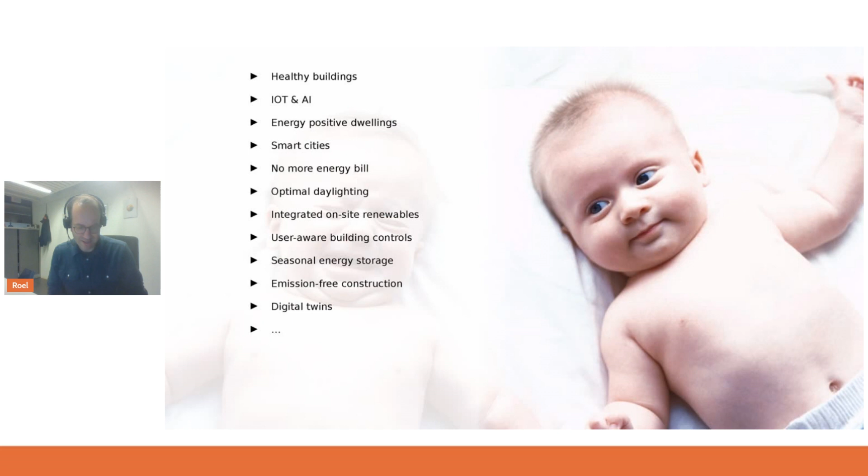What I observe is a lot of challenges, many reasons to get sad and upset, so really an urgent need to change the way we build. At the same time, there are many opportunities, many new ideas, potential. I think the future looks very bright and optimistic. It's just a matter of choosing.

We have lots of different technologies, different options. The question partly becomes which one to pick, how to be sure, and how to minimize risks. In this context, it becomes, I believe, increasingly important to make informed decisions, weighing different alternatives. There's not going to be a one size fits all solution that works for all buildings.

I think that's also what we see in the Powerskin Plus project. Especially there is this need for making balanced trade-offs. Sometimes we have competing requirements regarding comfort and energy or emissions, and how to balance those.

This is where my research focuses: bringing this all together using modeling and simulation methods, often with a focus on optimizing the indoor environment, creating conditions that are favorable for comfort in the first place, but closely related also to well-being and health aspects, really tackling these from an integrated perspective.

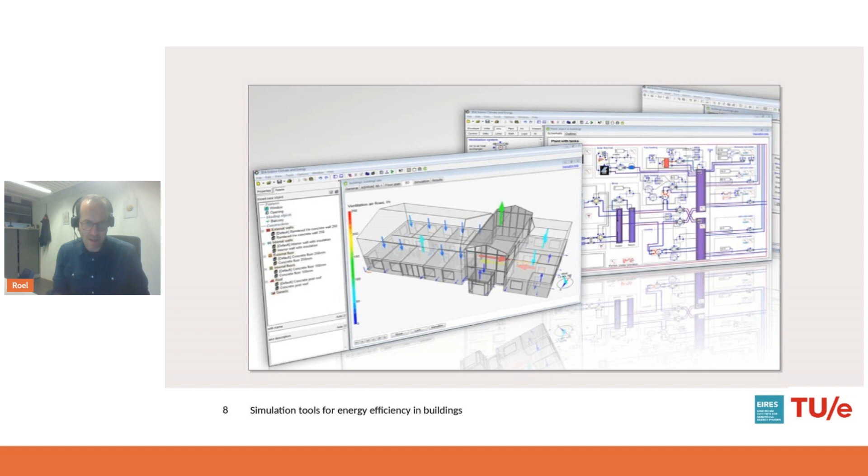Also in some projects, which I'll show you after, we can use similar types of models in product development settings, helping innovation teams sharpen their proposition, find out what does not work, try out products or combinations of products in different climates or building types. I've done this with a number of different companies.

Often with the aim of what we call bridging this valley of death, helping to go from a situation at low technology readiness levels, where there's a lot of attention for the research aspect, to high technology readiness levels, where we care more about commercialization and making sure new ideas actually land in the real world.

In the rest of this presentation, I'd like to show you one project in detail. It's an ongoing project we're still working on with project partners, primarily Pilkington and TNO here in the Netherlands. The idea is related to BIPV in transparent parts of the envelope.

What we have is a double or triple glazing solution with PV cell stripes. What makes it interesting about these PV cells is that they are bifacial. This means both from the front, facing the outside, and from the back, they can generate electricity from the light they receive.

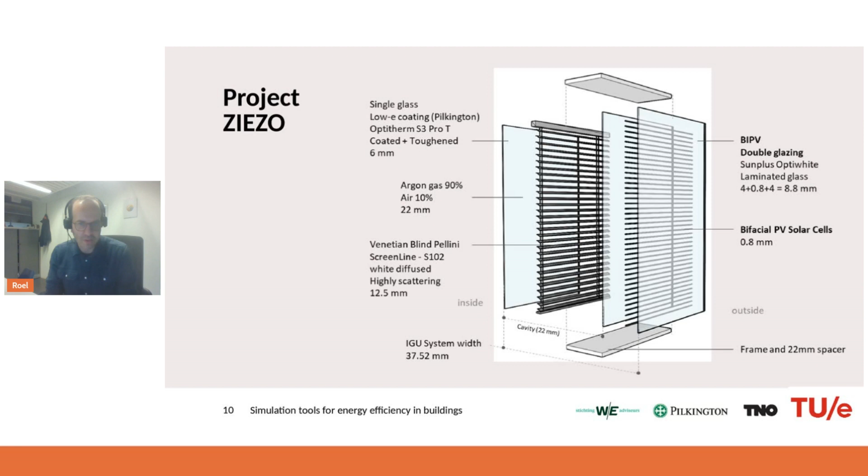In this R&D project, we are bringing this from a conceptual idea to hopefully as close as possible to the market by the end of the project. We are in our outdoor testing laboratory at the university, measuring the performance of different prototypes—different coverage ratios of the PV cell stripes, different reflective properties of the slats, and different control strategies of the blinds, so different angles.

In the lab outside, we primarily try to understand the electricity harvesting potential, so the solar cell part of it. But in parallel with this, we are using modeling and simulation to really understand the impact on occupants that would live in or inhabit rooms behind such a facade, trying to find a good optimum between glazing properties, PV cover ratio, blind properties in relation to the energy balance of the building, so both energy consumption and energy generation potential, and on the other hand, thermal and visual comfort inside the spaces.

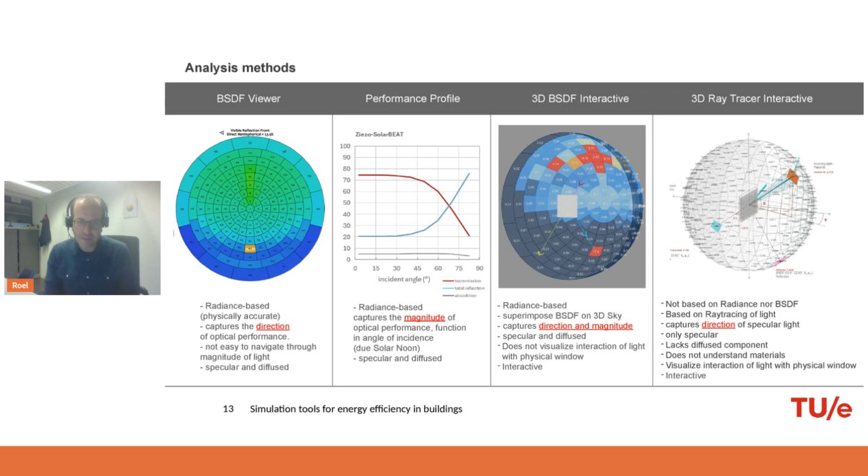For this, we use modeling and simulation at two different levels. The first level is what we see indicated here, what we call the component level, really trying to characterize light transport in such a system. We use ray tracing methods to find out, of the incident light, where is that going, how does it work in relation to the slat angle, direction of incoming light, both to see the amount of light that enters the inside, but also the light that gets reflected back onto the PV cells, as you can see here indicated in the middle figure.

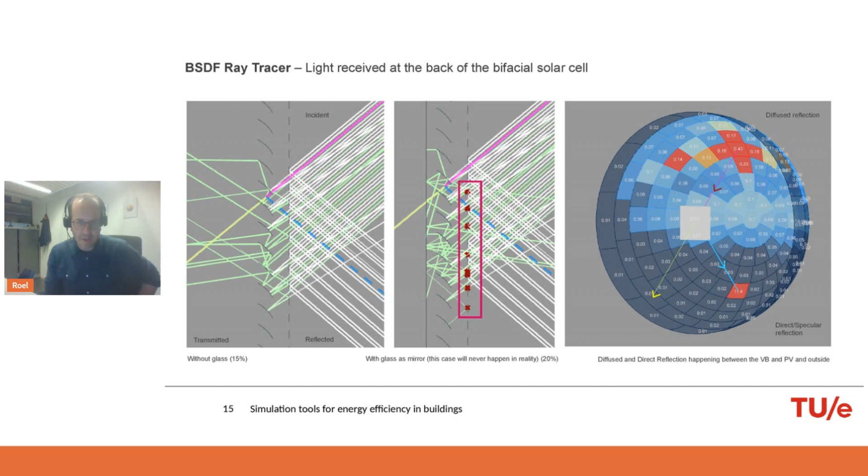Once we have such a characterization, we can export this into reflection, absorption, and transmission curves that can, on one hand, be used to compare performance of alternative systems, and on the other hand, serve as input to building level or room level simulation models. This also requires sometimes a little bit of tweaking of the code behind these simulation models to let them work with such novel technologies.

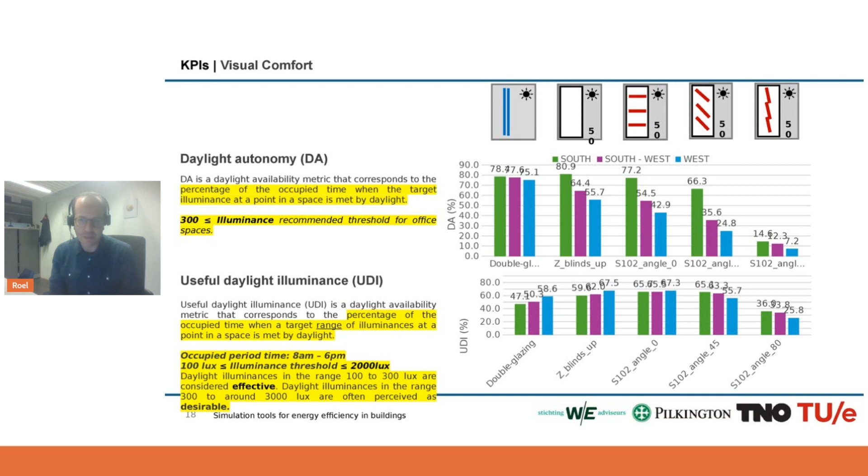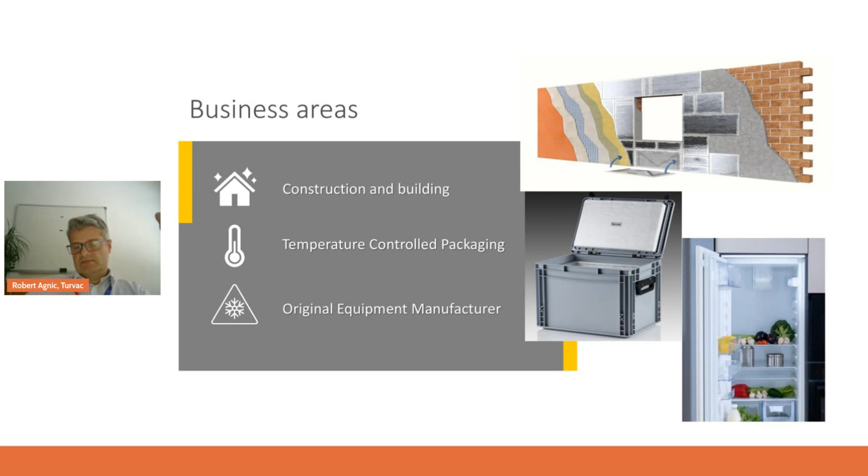Then also you can go how we are doing the product range. We're mainly using as a core fumed silica. This is the silica which is in microns, or we call it microparticles. These microparticles are done in such a way that they have microporous holes, and these holes contain air. During the production of the VIPs, you push this air out and you get the hollow structures, vacuumating those holes. That's the reason why you're getting so good

panels with low lambdas. There are several options that you can also combine them with some polyurethanes. You can combine them with some self-adhesive foils and so on. So there are several combinations.

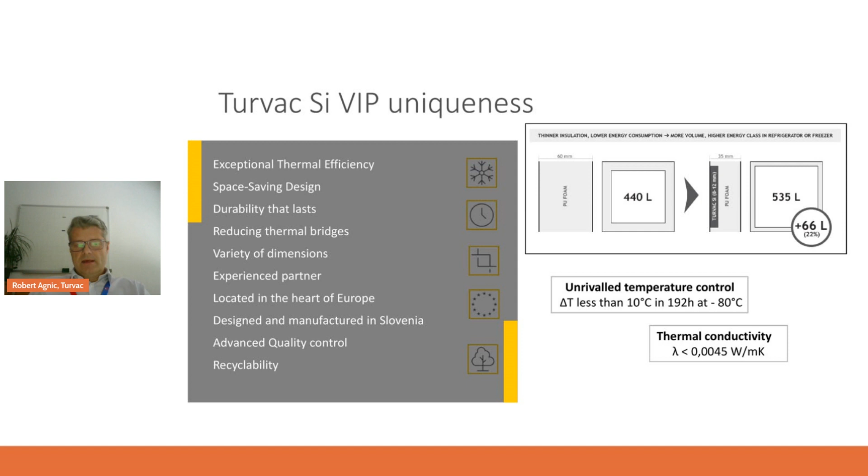Also, just to mention, if somebody's interested, we are also the competent center for VIPs for our Recticel and Turna group. Plus, you can also use our services for all others. We have really modern testing facilities in this new building, and especially what's most important is the reaction to fire test, all the mechanical tests needed for construction, and especially aging tests, because everybody was asking how long it takes, how long the VIPs can survive. If you're handling them properly, you can get 25 years minimum of usage, and this is for construction, a way ahead.

So that's on the laboratory, and I'm almost at the end. So thanks for listening to me, and if there are some questions, I'm ready to answer.

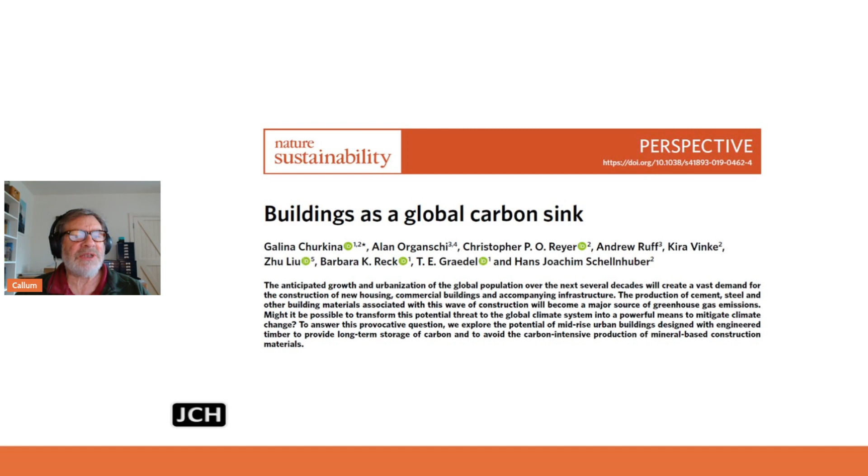There's been a lot of publicity about using buildings as a global carbon sink, and buildings are useful from this point of view because they're easy to see — it's easy to measure how much material is stored in them. But the rules currently used in life cycle assessment and environmental product declarations follow this so-called minus-one-plus-one rule: they track the flow of carbon through the whole life cycle, and although atmospheric carbon is absorbed during tree growth and stored in the building, at end of life it's treated as being emitted back into the atmosphere. So the net result, according to that methodology, is that there's no benefit whatsoever from using biogenic materials in construction.

The problem with such an approach is that although the maths adds up, it takes absolutely no account of the time of storage. This is always the problem when you do an LCA of a single product or building, because of this rule. There are other approaches, such as dynamic LCA, which I won't go into. But the main problem is that we're dealing with a single product, when really we should be dealing with a population of products — looking at how much carbon is stored in that stock of products, the same way we'd work with a forest.

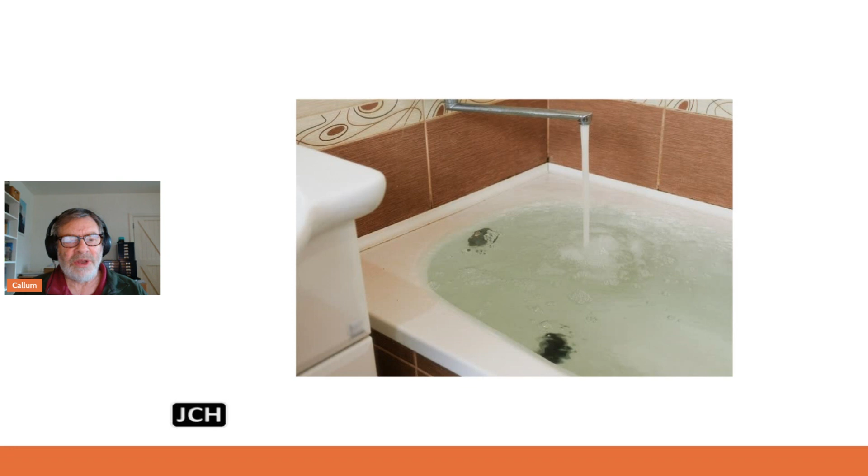It seems obvious that a stock has an inflow and an outflow. We can use the analogy of a bath where the plug is out and the tap is on — if the tap runs faster than the water leaks out, the bath fills up. Similarly with a balloon: if you blow harder than the air escapes through a hole, it fills up. These seem like trivial, childish examples, but it's interesting how people mix up stocks and flows in this subject. It should be self-evident that if you have a stock with equal inflow and outflow, the stock is stable. So if we measure the size of that stock over time, it is stable — that's a stock in equilibrium, which would be a situation where the number of buildings in a population is stable.

We are demolishing buildings at the same rate that we're building them. However, if the inflow into that stock exceeds the outflow, then that stock will increase—that would be a situation where we demolish at a lower rate than we build. Similarly, if we demolish faster than we build, that stock decreases. So this stock represents a carbon flow into and out of a building pool.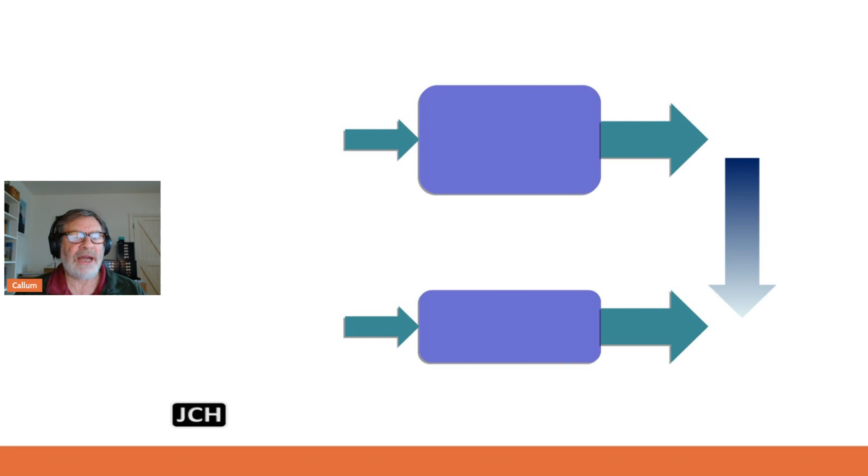Now the inflow—excuse me, I need to go back to the other slide. The problem is it doesn't have a graph with it, and it used to. The inflow is treated as being constant, and in this model we just put a number on that: we say we have 1 ton of carbon flowing into the pool every year.

Then we have to model how the carbon flows out of the pool. To do that, you model using a decay function, because we're looking at a population. Over time, although the carbon has gone into the pool, it will slowly leak out and back into the atmosphere, but not immediately—it follows some sort of decay curve. The default function the IPCC recommends, if you have no evidence to the contrary, is an exponential decay. I'm going to explore the consequences of using an exponential decay compared with other decay functions.

The problem with an exponential decay function is that it assumes that from year zero you start leaking carbon out. That means your building stock essentially starts being demolished right from year zero, and that's not a very realistic assumption.

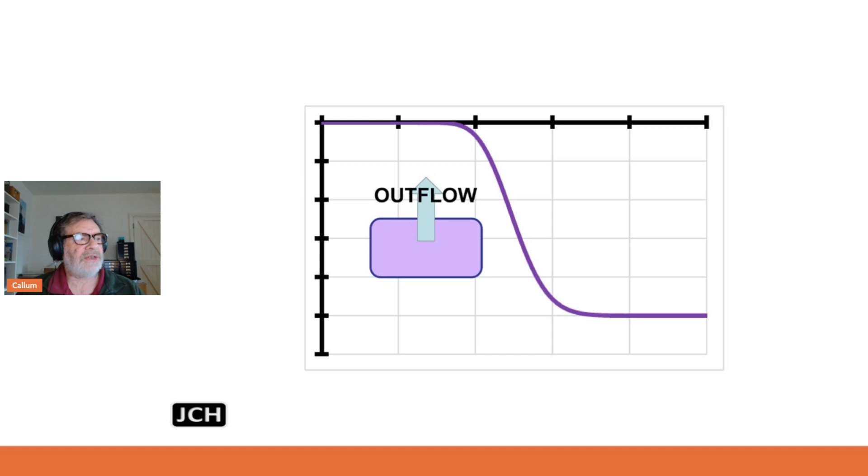We can have different types of function, and we can measure their probability and their cumulative distribution, and the shapes of those functions can also vary.

So if we start with a model where at time zero the stock is zero, with an inflow of 1 ton of carbon per year, and an outflow determined by a statistical function—excuse me, we're getting some blank slides for some reason—then if we look at the effect of doubling the lifetime of that building stock, the average lifetime, we find that the carbon stock doubles in size.

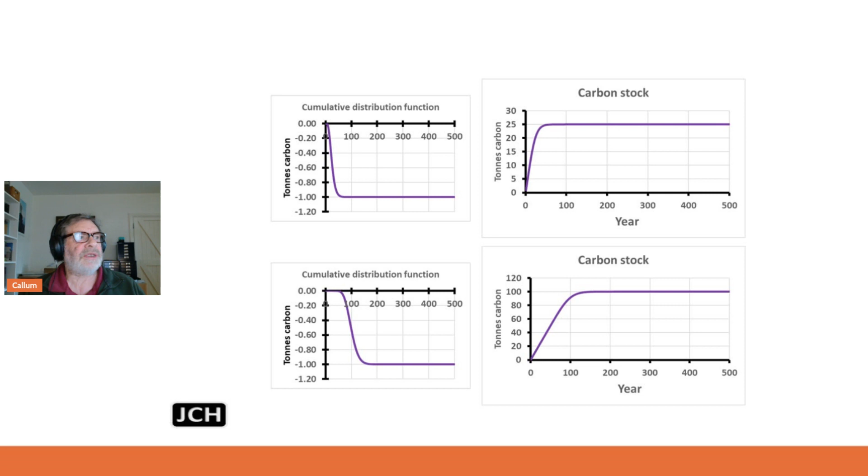Very strange, right? Okay. We can also look at the effect of cascading of those products from the first life to the second life.

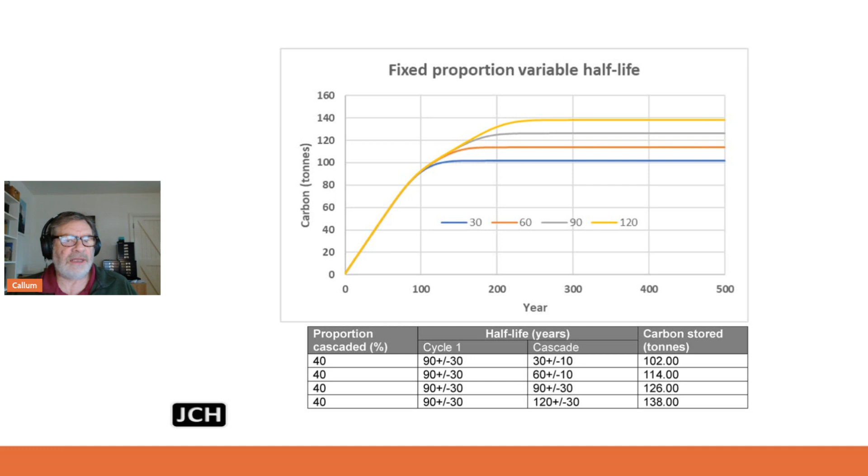So the result is basically that lifetime extension is much more important, and the benefits of carbon storage can only be determined by using a materials flow analysis—it doesn't work very well if you use life cycle assessment. And if you're going to use life cycle assessment to prove the benefits of circularity, it's not that simple, because there are many factors you need to take into account.

Right, okay. I have to say, that is the talk I was expecting to see—so I've got a completely different one up on my computer. That threw me a bit. I think that's the one I uploaded yesterday as a practice. Okay, I can only apologize for that. That's the end of my talk. Thank you very much.

Okay, sorry, Callum, I thought the other one had been uploaded. So yeah, we probably would miss the different application. Anyhow, I went through it and I thought, oh, that's all right, but I should have gone a bit further in the slides.

Anyhow, it was great because it showed us a completely different perspective of what we are normally focused on with these LCA approaches, and it's great to know about this issue of life extension, which is the most important thing when dealing with this type of materials. I'm not very acquainted with this line of approach, so I would try to seize the opportunity

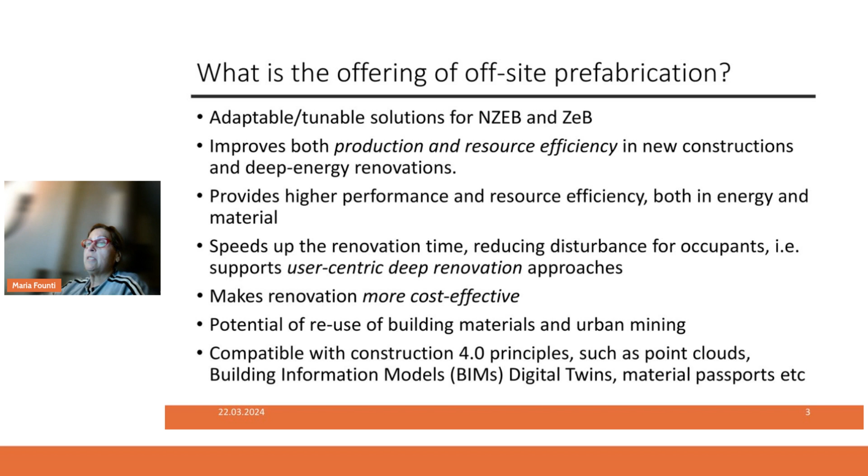Let me briefly introduce the Plural key objectives. The Plural project, now in its 4th year and ending in September 2024, aims to design, validate, and demonstrate a palette of adaptable, scalable, off-site prefabricated kits, which we call Plug and Use, PNU. It's a paraphrase of plug and play because we take into account the user, the tenant requirements.

The challenge was how to identify, select, and integrate various renewable energy technologies into prefabrication practices to create adaptable, multifunctional facade components. We ended up with hybrid passive and active facade systems that operate in one kit, working together in synergy for facade retrofitting, ensuring near zero energy buildings, fast-track renovation, cost-effective and environmentally friendly deep renovation, and flexibility and adaptability.

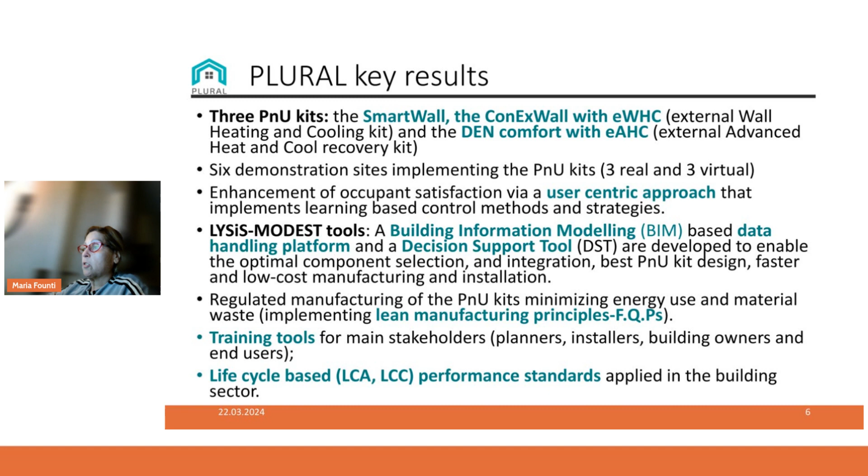Here is a small picture of the 3 PNU kits that we developed in the frame of the Plural project. The first one is called Smart Wall. It's a hybrid system that includes in its prefabrication, as you can see from the photo, a PV element together with a control system and smart sensoring, as well as a fire suppression system and a fan coil, which collaborate together with the renewable energy source, the PV system, to create an intelligent multifunctional envelope component that can be easily installed at any type of building.

On the right hand, you see the photo of the installation of the smart wall at the living lab at the premises of NTUA, the National Technical University of Athens in Greece. The smart wall is also equipped with energy harvesting windows, multi-pane windows that include a heat exchanger and special coatings that allow either to harvest heat during the winter or cool the interior space during the summer period.

The second system is called DEN comfort, and it is based on a pre-existing patent of the partner Denvelops in Spain. They were previously producing folding facades in the format you see in the middle picture. In the frame of the project, these folding facades were equipped with additional insulation layers and air handling units, small components integrated in the design of the folding facade together with PVs, that are able to control the indoor air quality of the building they are installed in.

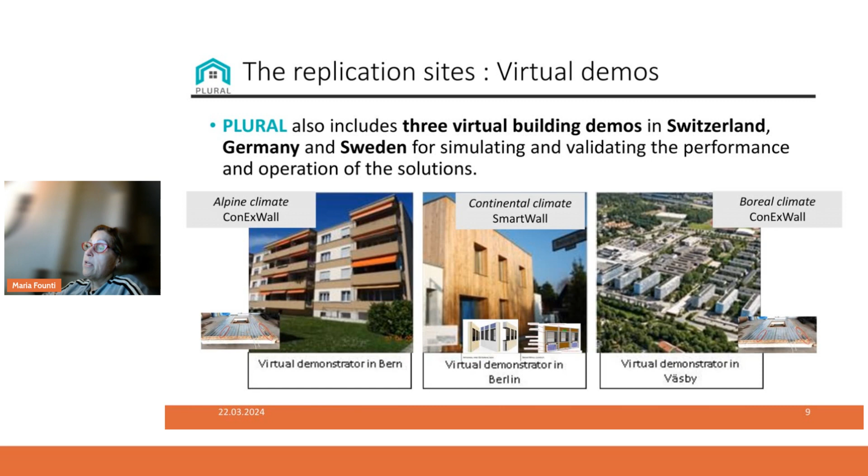So just very briefly, what we have achieved through this type of hybrid prefabricated renovation: we managed to reduce the U value of the wall from a target value set at the beginning of 0.23 watts per meter square Kelvin to well below this value. We managed to reduce the primary energy consumption per building to meet the local net zero energy building standards for all 3 cases. We significantly reduced the equivalent CO2 emissions at the operational phase of the building, with values well below the set targets at the beginning of the project.

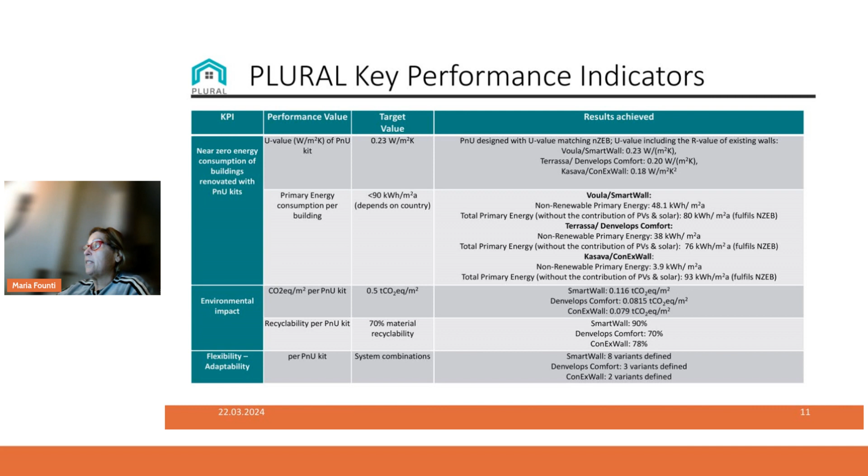The folding facade wall of Denvelops Comfort is also appropriate for all climates, apart from extreme cold climatic conditions, for buildings before 2010, and it can go up to 7 stories, again with a significant reduction of the U value. I would like to add that the smart wall can be implemented either on the external or the internal facade of the building to be renovated.

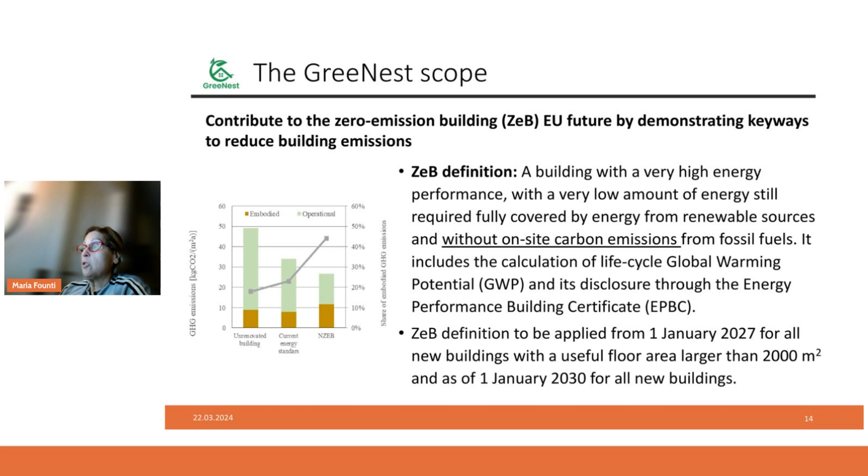We are trying to contribute to the EU future of zero emission buildings by demonstrating key ways to reduce building emissions. We do this by promoting 100% carbon-free construction that not only meets the near zero energy building status, but also ensures reduction of greenhouse gas emissions at the operational stage of the building by 60%.

We aim to increase productivity by 30% based on local value chains, using digitized, time-efficient, prefabricated design, manufacturing, and construction methods for timber, used timber, and prefabricated earthen components, developing flexible and adaptable components, and promoting circularity.

So let me go on. What are we doing in the GreeNest project? We are developing what we call 16 standardized packages. These are solutions that go from the level of material. We are developing systems based, for instance, on coffee bean waste, on waste wood material, on dowel laminated timber.

We develop a number of solutions based on digital tools that can effectively control the production of embodied and end-of-life carbon.

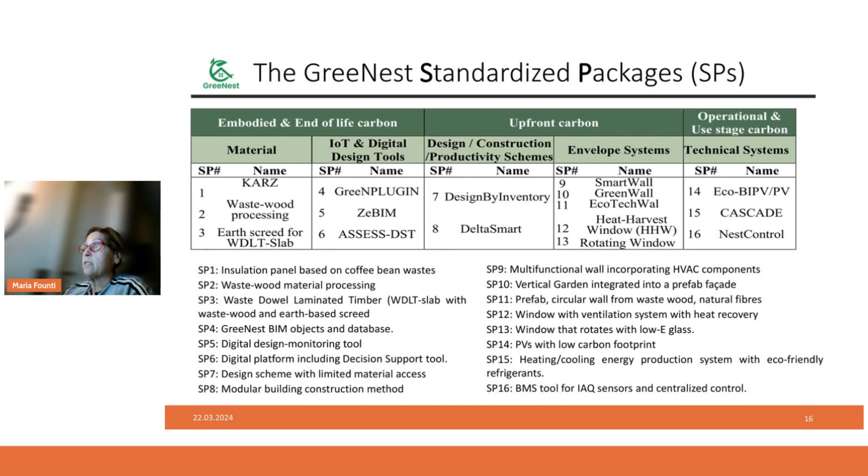All these 16 standardized packages are combined and implemented in 4 different demonstration buildings, which are a lighthouse to our understanding. The first one is a very innovative building, which is going to be constructed in 2025 by the Technical University of Berlin at their headquarters, aiming to demonstrate all the principles of bio-based construction.

In this building, we are going to demonstrate the envelope systems that will use waste from coffee beans together with recycled wood, and heat pumps and PVs that will have a very low environmental footprint.

The second building is a residential building, again in Berlin, and we are going to construct the top floor of a student housing building totally out of recycled wood, with heat pumps and photovoltaics to reduce the operational footprint.

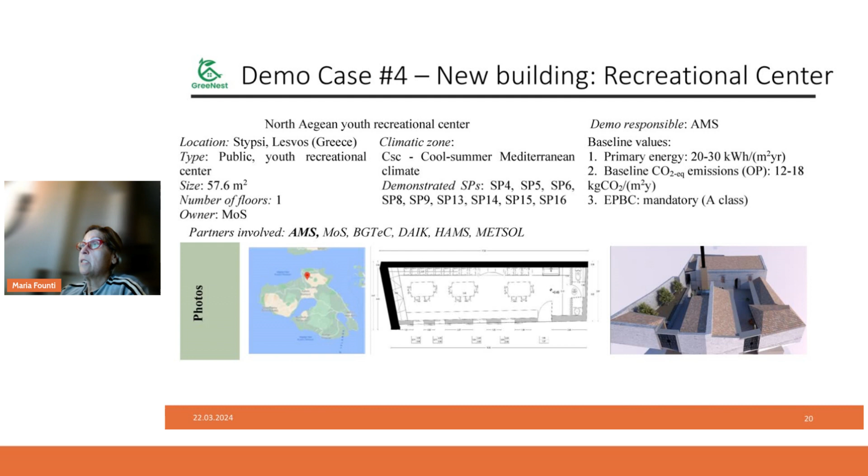The third building that we are going to construct is on an island in Greece, where they have limited access to resources, and we are going to use local materials: stone, recycled wood, and sheep wool, to construct a building that will be used as a youth recreational center.

And I think I jumped one. Here it is. It is a very nice demonstration case in Porto Viro in Italy, at the delta of the Po River, which is a protected area. We are going to construct there a lodge for fishermen with green walls, equipped with vegetation that can be used by the fishermen during their recreation time.

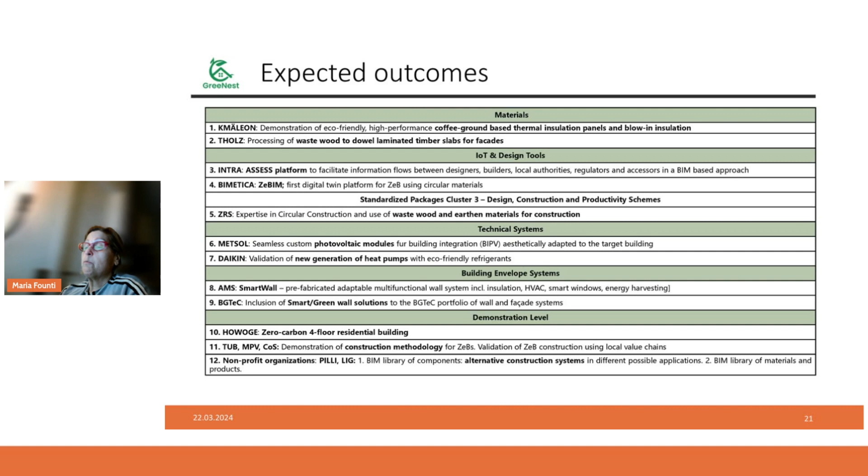So all this, we expect, will give us a number of innovative outcomes in terms of materials, design tools, technical systems, and building envelope systems, demonstrated in the 4 different buildings that I just showed you. And the long-term impacts that we expect to achieve at the end of this project, which just started in January and will last for 4 years...

...is to promote the use of nature bio-earth-based materials to reduce emissions by more than 20% by 2050, to reuse building materials and components to lead to a potential emission reduction of more than 10% by 2050, through the innovative design procedure to reduce material consumption by more than 10%, and to implement digital tools in material design to avoid waste, reducing emissions again by 18%.

Through the use of local resources with low environmental footprint, refrigerants in the case of heat pumps, and coatings in the case of building integrated PVs, to reduce emissions for the whole life cycle by more than 25%, and enhance user comfort with the potential emission reduction by more than 11% by 2050.